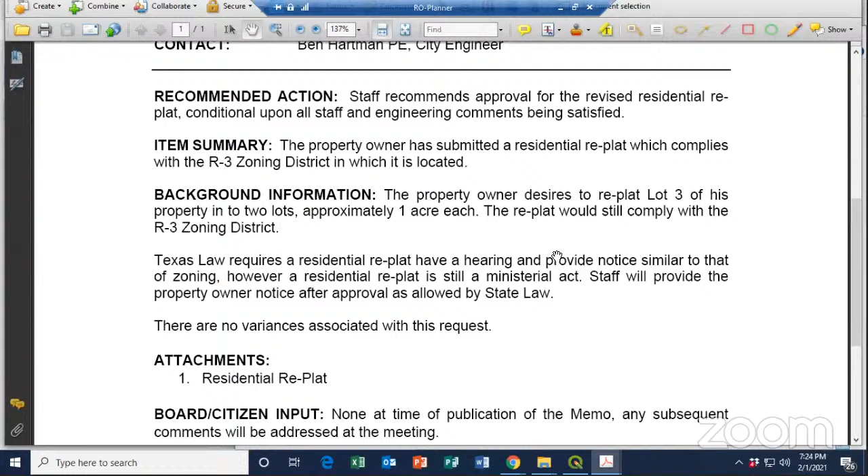Staff. Yeah, and you can see this, right? I'm sharing this correctly. So this is a very straightforward case. It's a residential replat. We've talked about residential replats before. They're a ministerial act. There are no variances or anything of that nature affiliated with this residential replat. He's basically just dividing it into 2 lots, approximately 1 acre each.

The zoning district is R3. And let me get you an image here. So again, this is off Crestview, but as you can see, to the left there's already 2 similarly sized lots. So this was an area that had kind of the 2 acre or 2+ acre lots, and a lot of people have been subdividing them into about 1 acre lots, because also with the need for septic, I don't believe there's sewer over there right now.

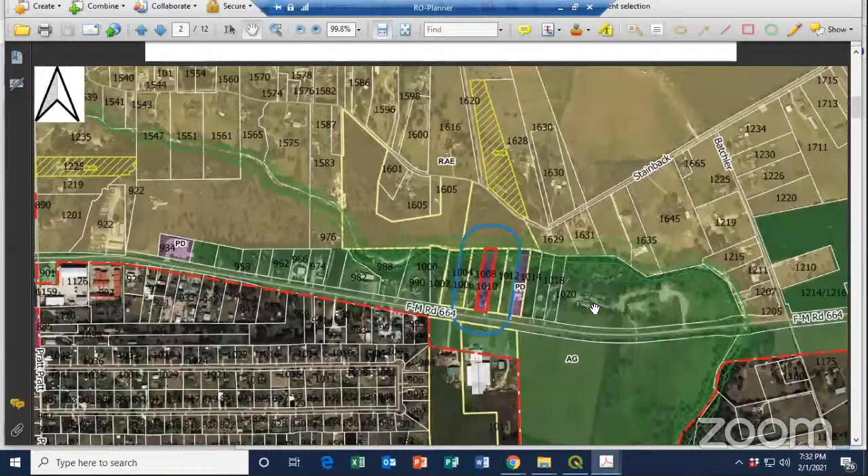So as y'all may be aware, TxDOT is widening Ovilla, also known as FM 664, and in the process they're having to do some takings up and down the road. So one issue that has come up is, in this case, let me zoom in so you can see a little better, at 1008 Ovilla.

This house was built a couple of years ago. It was zoned PD 101, so it's a custom zoning district, kind of like a site plan district. It uses residential estate as the basis for the zoning, generally speaking, but they did put in specific building plans for it.

One thing though is the house, with where they did end up siting it, which was fine, but when TxDOT comes in and does their takings, then they'll have a legal non-conforming site. So by changing the zoning and having it all conforming, then you have a legal conforming zoning district. That is better than having a non-conforming zoning district.

The other thing I guess I could point out is the house next door, like two doors down, that house isn't very old. It's pretty nice as well, but as you can tell, it's set back much further, so there was no need to initiate a zoning amendment for him because he still clears his setback requirements. That's since PD 101 and 1008 Ovilla, we're trying to help him out.

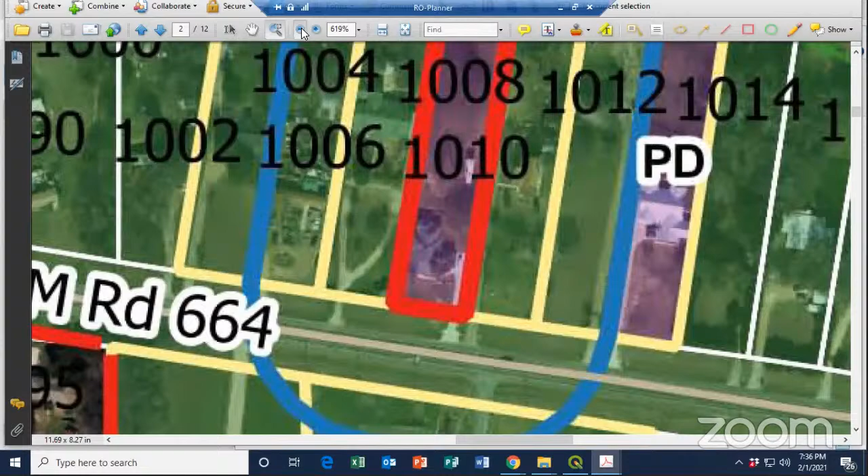Okay, and like you said, I guess all the parcels are going to be done at different times. Yeah, we're kind of waiting to hear from TxDOT on which ones they're saying, well hey, this guy is completely out of his zoning district now, or they give us site plans showing how much parking they're taking or if they're taking away a sign or something like that, and we would have to specifically adjust the zoning to make it work for them so that they can have what they did have, or at least make them conforming with their zoning. Because again, we don't want people getting hamstrung and not being able to sell their property when they do want to sell it just because it's out of compliance.

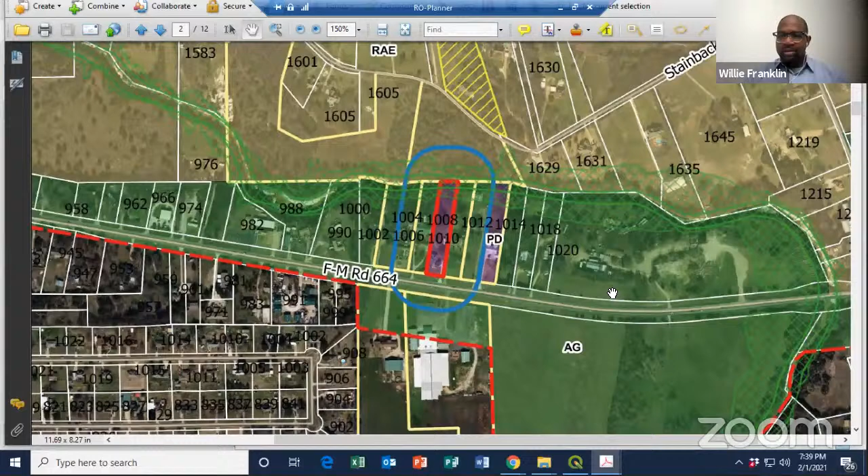If not, can I have a motion please for agenda item E? Go ahead, Mr. Vice. I motion we approve agenda item E. I second. All in favor? Aye. Aye. Any opposed? Agenda item E is approved as written.

Moving along, we're going to agenda item F. There's going to be some changes on F where, as commissioners, we're not going to have a vote. I don't know if Mr. Brewer is online. We're going to have a dialogue with the applicant, and we're going to move this to the next planning and zoning meeting. We have to make a correction for agenda item F.

So, staff, my understanding is we can't take action and vote, but we can have a discussion. We've still been kind of working with the applicant on a few changes anyway, so it may be for the best in the long run.

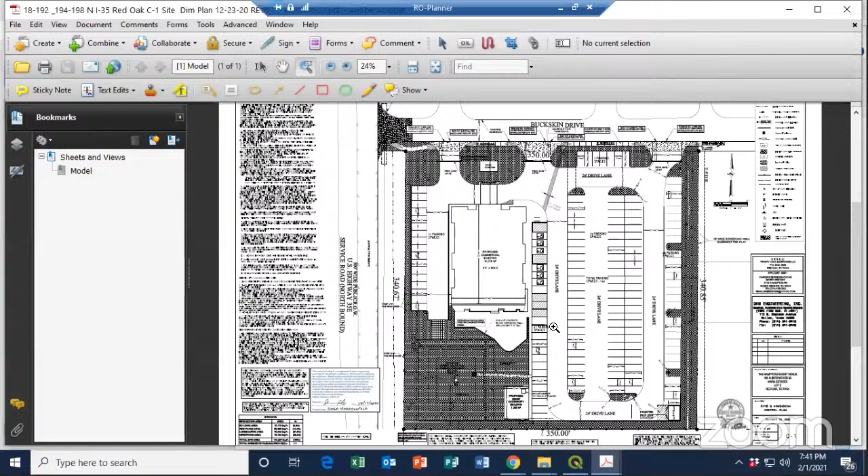So this is the Hamptons Event Center at 196 Interstate IH-35 on the east side of the highway near Buckskin Drive. Y'all may have noticed it, kind of a two-tone building. It's about 10,000 square feet that exists there now.

Mr. Brewer is interested here to the south - let me zoom in for you a little bit more - having what we're calling an accessory building of around 1,200 square feet to function kind of like a chapel service. He does mostly weddings and those kinds of special events, generally speaking. He's found a need to try to better facilitate his events, to have a separate chapel. Some of his guests may want to do a wedding service with their own church, but not everyone does or can get that time slot they're looking for. So he's providing this as part of his business plan.

The other thing is putting the building here means relocating a dumpster, so the dumpster ends up over here in the bottom right-hand corner. No real issue with that. You do lose, I believe, one space in the end by doing this, but he still has 153 spaces, and 150 were required in his PD.

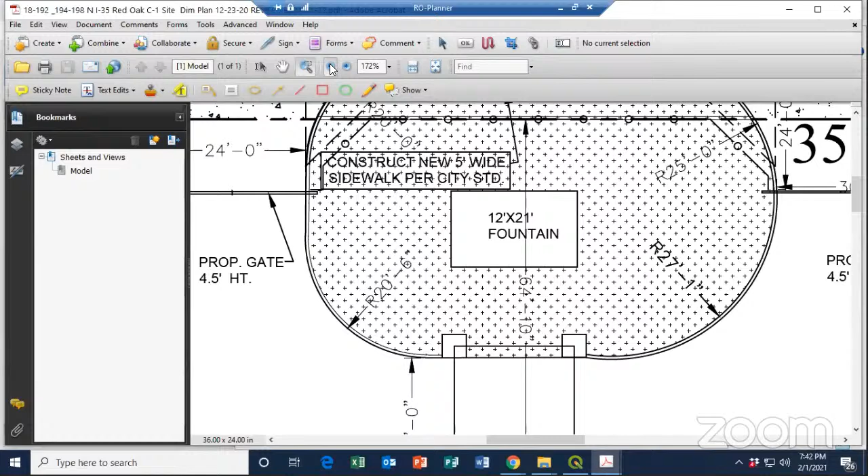Then also up front, north of the main building, he's got a fountain feature that he calls it. It also kind of looks a little bit like a monument sign. Anyways, just understand that it's there now.

I think Mr. Brewer didn't fully understand the nature of his PD. Like some people, they think they've basically got a commercial district - I mean, they do to some degree, but he has specific development plans that were submitted. So when he does stuff, a lot of it he actually really needs to come in and amend or revise that PD kind of every time. That's kind of just the downside with the planned development zoning district - unless you worked it in to have those kinds of freedoms, you've got to come back to the zoning commission and council.

Since he had already built this fountain, we asked him to put it on the development plan, just to try to align with what he's already done. So just so you know, this is there. I mean, he technically shouldn't have done it, but it's basically a fountain that's a big square cube in the middle with an H on the front.

So it's not like a sign that reads text, but it does have a letter. As a planner, I'd call it a sign, but it's also a water feature. So I mean, it's both - it's a water monument sign. But not a real issue with it though.

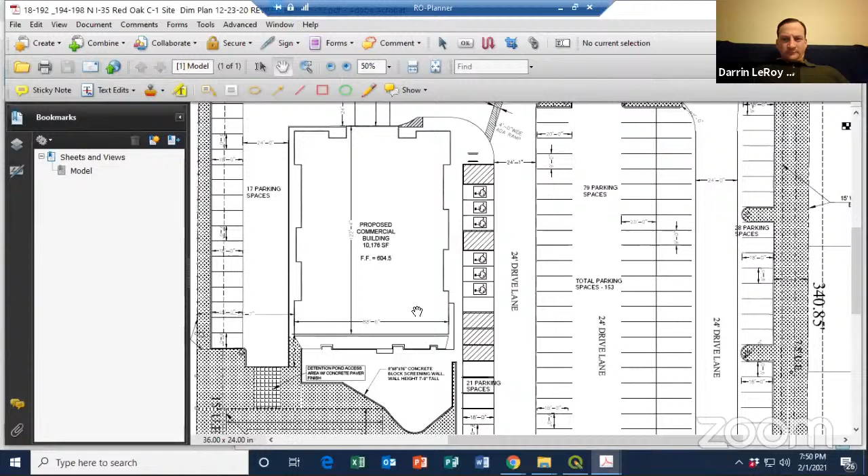Well, that's been the other thing with the parking, we don't exactly have something that fits this cleanly as far as a parking code classification for an event center. So one approach in zoning is you can start trying to slice and dice all the different uses and all the different places and calculating a complicated square footage.

The thing is, just as with his max occupancy being at 440, that depends on what the event is. There are certain event patterns he does where he's limited to closer to the 300 mark, depending on if he's got a bunch of tables set up or not. So his capacity is going to fluctuate.

I would think that a simple rule of thumb, when I was looking, seemed to be more the idea of, if you assume 3 people per car might come, you've got 153 parking spaces, so you can support 459 people. So if you have a max occupancy of 440 and you can support 459 people by that number, then you have more than enough parking.

I also talked to Chief Wolf, our police chief, and asked him to run, looking back 2 years for this area, has he had any complaints about parking? Like the idea of if Mr. Brewer had some big event, did you have any spillover? And Police Chief Wolf confirmed that they've had no issues.

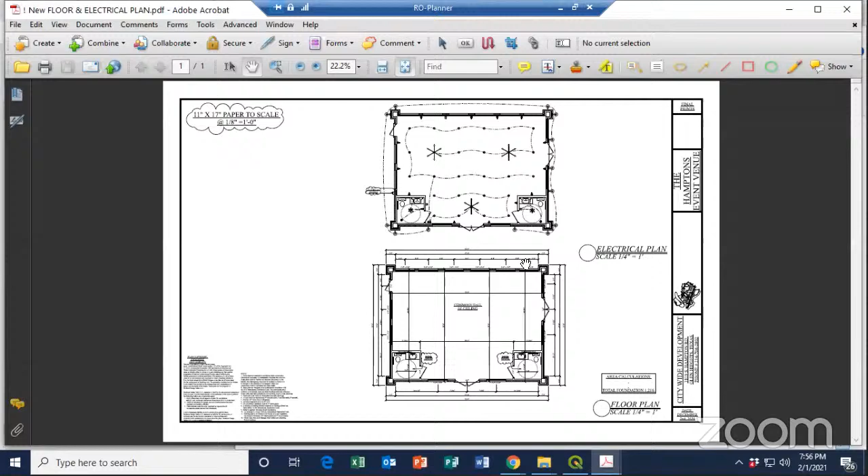He's claiming that his use would be more as, like Brian says, an accessory to the main use at the building. So you do something over in the small building, but then everybody or a certain amount of the party would then move over to the bigger building. That's not to say we're going to sit out there and try to police that, but that's what the applicant has said his intent is.

Here's the floor plan of the proposed building, ceremony hall is what he's calling it. Like I said, there's two bathrooms and just a big open floor plan. It's pretty simple. Then the elevations, we just got, Dave's been working on them.

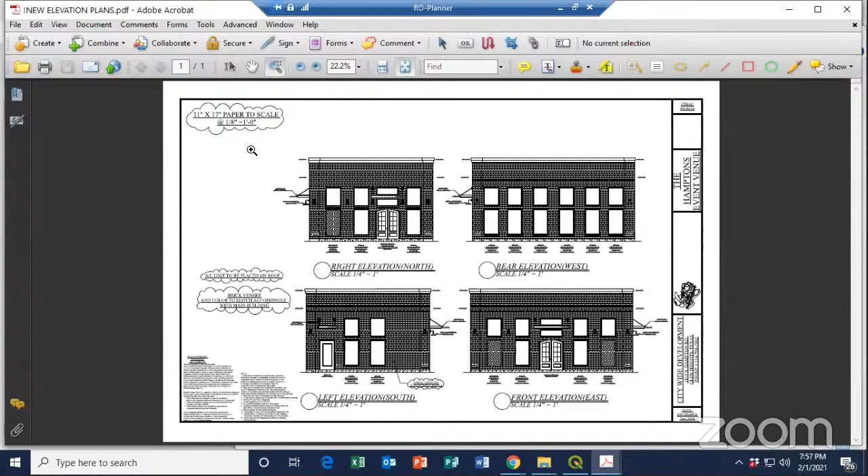He had a good idea, so he needed to work on them over the weekend. It's a little hard to see. If I go back to the floor plan real quick, it may make more sense.

You see how there's kind of these bump outs on the corners there? Before he had more of a box shape, and it looks boxy here, but if you imagine those bump outs, the intent is to mirror more of the main building, which y'all have seen on I-35. It's kind of got that horizontal articulation or variation where the wall goes in and out. So he's just trying to mirror that.

He says he'll paint to match the colors, and this top cap's going to be stucco. This is a fairly high parapet wall. The idea is you would not see the HVAC or mechanical equipment from the road, for sure.

It's the south elevation down here. This is the one that again faces south, the least visible. So the service panel will be run underground and connect to the back of the building, trying to make it the least visible.

But it's got lots of windows, and where there's not windows, he's got kind of the faux windows with the brick pattern, using similar elements of the wall sconces and the overhang as the main building. So that's the intent, is to just do like a mini version, as it were, of the main building.

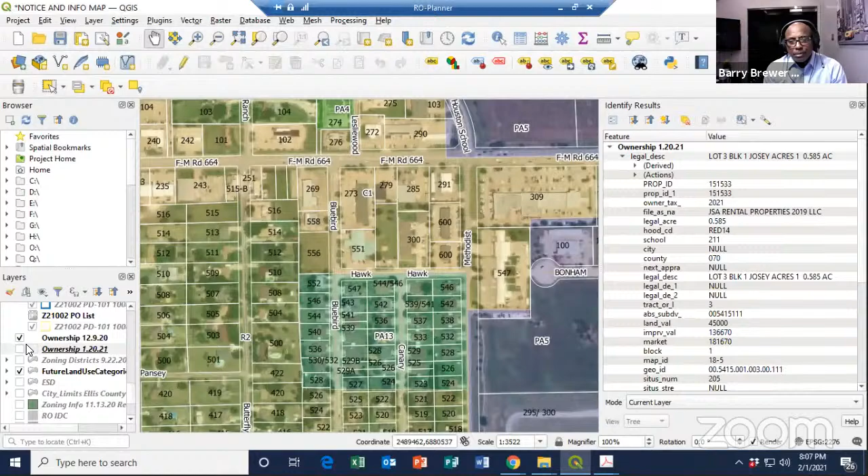Now, in most cases, the property south of me is zoned residential, so most of the time you'd have a masonry wall there. Another concern is just passersby. Once they do the enlargement of the freeway, there would be a sidewalk. Not only do we want the privacy fence for that reason, but we don't want passersby jumping into this detention pond. So that's another area of concern. We definitely want to enclose that to keep the outside public from going swimming on a hot summer evening, but also bring the beauty to what we're trying to create here at the Hamptons at Red Oak.

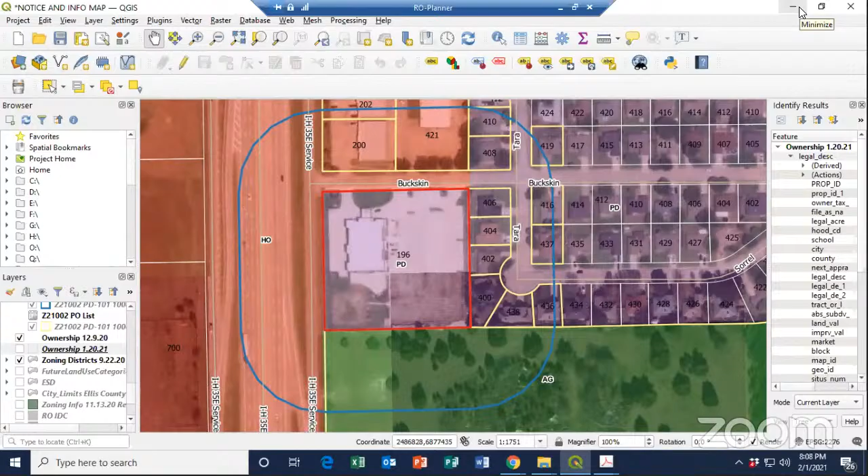Okay, makes sense. Thank you, Mr. Brewer. I believe that's all we have on our side. Unless Brian, you want to add something?

Yeah, well, I think it's one of the things, if you're wanting to create sort of this oasis, as it were, we kind of need to see a little more detail. Because we've got this detention pond area, but got the building here, so is there going to be a patio? Is there going to be a pergola? What's all this area around the building between the detention pond and this building going to be? So we're going to need to see that too for the PD. We need to see some idea of what they do there.

That's all landscaping now. We're not changing anything as far as landscaping. What we're trying to do is put a privacy fence around the southwest corner. We're not adding anything. We have a ton of landscaping. We have a pond that's a detention pond there. Basically, we're just trying to bring some privacy and protection to this portion of that pond area. That's pretty much it. We're not adding any landscaping. We have a ton of landscaping. We don't need to add any landscape.

We do not want a fence directly behind the building. That wouldn't be appealing to my eye or to anyone else who might consider having a wedding. So basically what I'm asking for is a fence around that back portion. Now, it should be code that I have one around a detention pond anyway. That should be code, so we really shouldn't be talking about whether there should be a fence. I guess the biggest issue is what type of fence will you guys allow me to have.

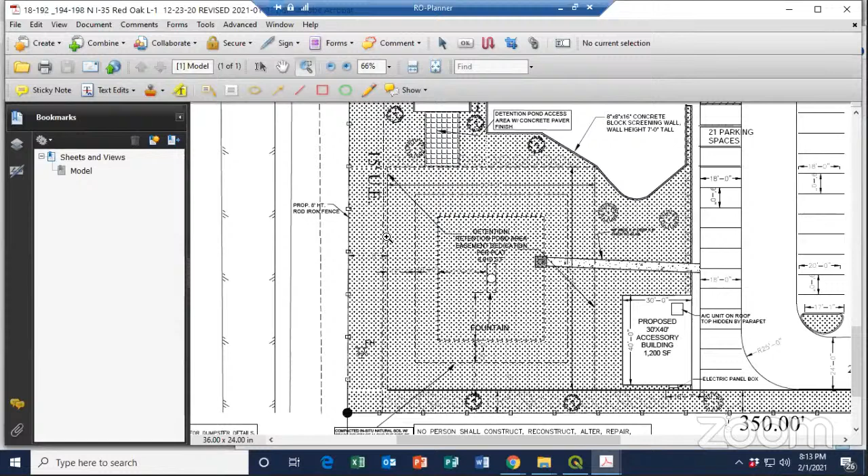And if that was something he wanted to do, if it were me, I'd rather see some trees and shrubs in front of a CMU wall if I'm driving down the road. Well, I can't put any more - I can't put any trees. We have TxDOT coming in. There's no more trees. TxDOT already picked up 2 feet of my property, so there's no room for trees.

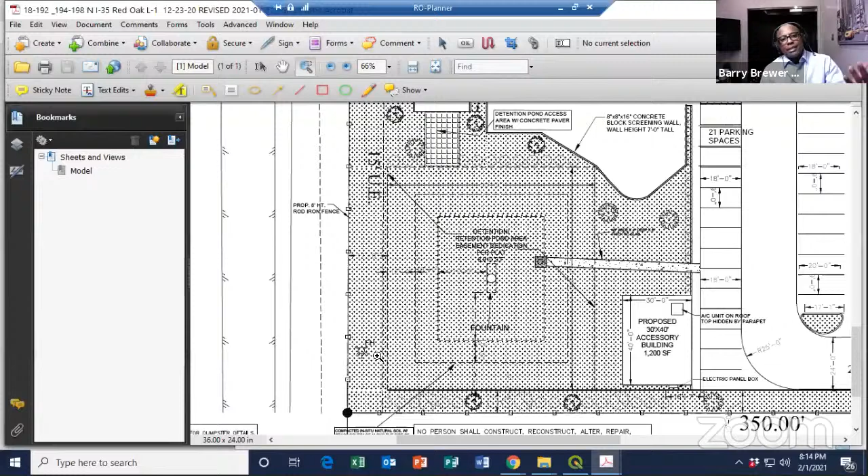We can forget about the west side - that's not happening because they'll be, I believe, within the next 2 months working on that. Once they get started, we have an open concept to construction, open to the freeway as well. So, at the end of the day, Brian, the address was placed wrong. If the address was placed right, we could probably move forward.

If you guys tell me what type of fence is suitable for the Red Oak, I'll do it. I don't have a problem with it. I just want to move forward tonight because I had this on the agenda for tonight. So if we can discuss it and get it finalized, I'm good with whatever fence you come up with.

Okay, so Brian, what we need to just produce to Mr. Brewer - some pictures? No, I mean, there's an opportunity for y'all to have a chance to give any kind of advice, so when we bring it back next month, hopefully it's a real quick hearing.

And like I said, to me his issue is just the fence part, right? Is it just a fence? He's open to... yeah, I mean, we're asking for - he's not. Yeah, it's just one of the things - staff shouldn't be in the position of necessarily trying to design anything for anybody. That's what the consultants are for. But we want to be mindful on y'all's behalf of what comes in front of you on the aesthetics.

So if he's saying he'll build whatever y'all may ask, and there's no room for any landscaping, and if he wants the highest performing sound deadening option, it sounds to me like that's a solid wall. I don't recall if you can go over 6 feet with a solid masonry wall. I believe it's 8 feet. If not, I guess you could do a 2-foot wood topper on it, but it seems like it's going to have to be a really nice looking wall fence, if it's going to be that prominent on I-35, I would think.

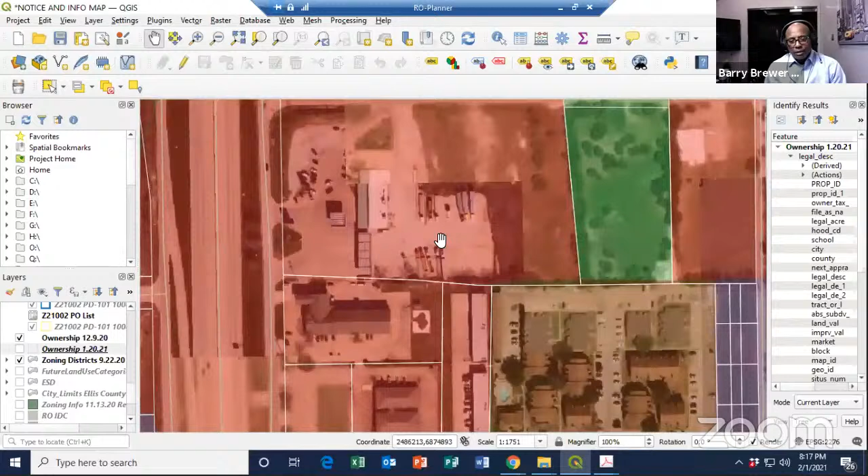But Brian, you guys allowed for a chain link fence 2 blocks up for the truck company that needed to protect their equipment. It seemed to be just recently repaired or replaced, but it's a full chain link fence with barbed wire on it. So I'm just asking for a good looking fence with some privacy, that's pretty much it. But if you go up the street there, you have a full chain link fence around this guy's property.

Once again, I'm just trying to come up with a final conclusion since for some reason my address was placed up the street. I was supposed to hear this out tonight and get it finalized to move forward. I would still like to discuss, let's come up with a fence as if my address was right on this evening, and let's get it finalized so we can move forward for next month. That's what I'm asking, since the address was mistakenly put in the system wrong.

Well, since you brought up the truck stop, just so everyone's clear, the truck stop is zoned highway oriented. I don't know anything about barbed wire. No, not the truck stop, it's some company that starts with a K, I can't think of the company name, but it's right up the street.

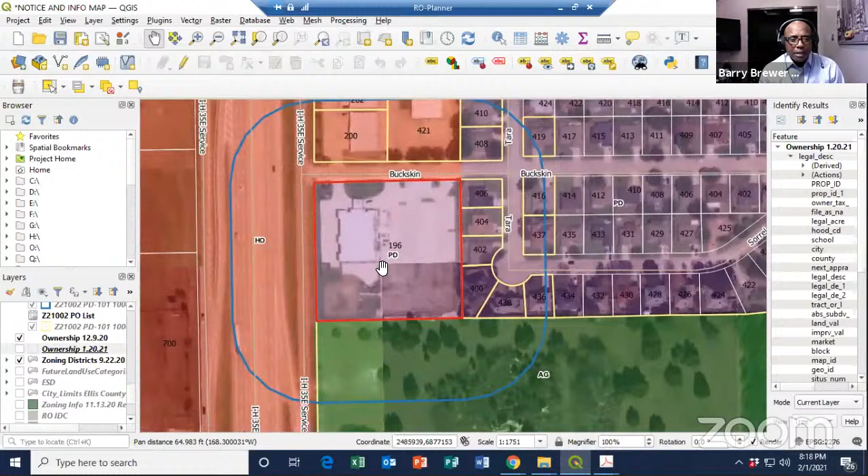Yeah, it's zoned differently. I was on the council when that was done. Okay, and I understand it. Yeah, that may be it there. I mean zoned differently, I understand that, but at the same time it's on the highway. I mean anytime it faces the highway, the city, I mean, hey. I can kind of speak to that from past experience, we would love for that not to have been on the highway. That's been there a long time. Okay, unfortunately. But go ahead, sir.

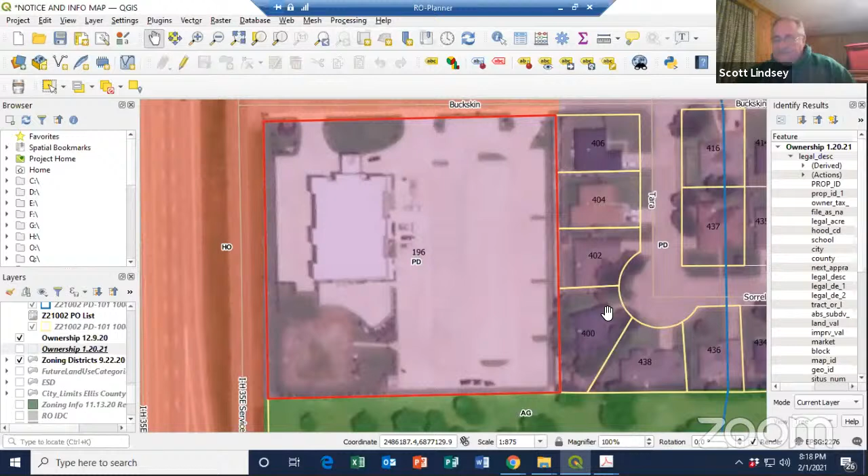No, I'm willing to do whatever, guys. If you guys think a masonry fence, I would do a masonry fence that mirrors what I have. I don't want to get too far off track to where we have 4 or 5 different fences. But if you guys think a cedar fence would look good, I would do that, I don't have a problem with that. I mean the biggest thing, I know sound is my biggest component now, but I really want to take the visual aspect out of it as well.

Let me look up this code here real quick. Okay, so yeah, you can go up to 8 feet. So if you wanted to do a masonry wall, you could go up to 8 feet, if we were applying the standard code anyway. So it sounds like you've got 8 feet to work with anyway, whether you wanted to do a masonry wall or bring whatever forward for them to consider.

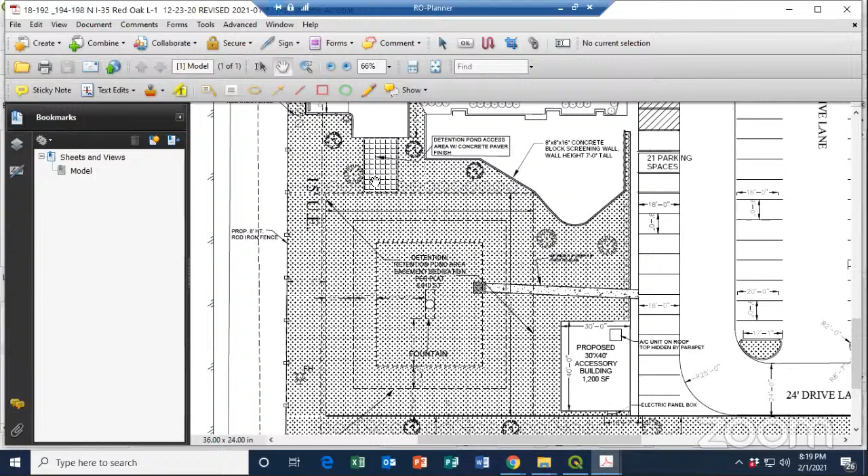Right, he just needs to bring that next month. Since we're hearing it next month, he needs to bring in pictures of the masonry wall. Sounds good. And just to be clear, I'm not taking the wall all the way up the west side. I would take it, if you go right there, just where you have it pinned, it will stop right there, and that'll be it. That'll be the exit point there, and then you drop down to a 4-foot type of fence.

Yeah, so basically kind of like where the parking lot begins. Right, so then it would transition or drop down. And again, that's kind of like one of those points, I guess I should ask y'all, since we're here, would you want to see it transition, or would you want to see a 90-degree drop? Because those are the kind of details that are subjective, it's hard for staff to tell an applicant do a transition or do a drop. So it'd be good, since we're here, if y'all have a preference, to let them know now.

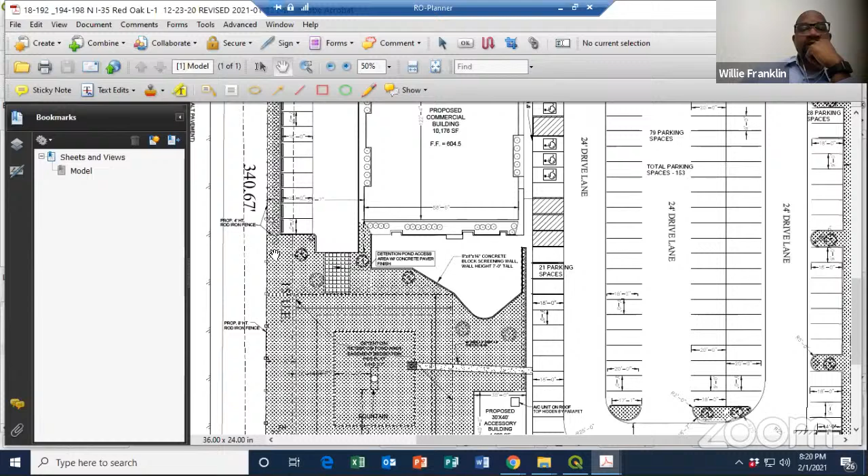I would love to see the transition. Personally, that's what I would prefer to see versus the drop. I think it gives a cleaner look, in my opinion. Agree. Mr. Brewer, is that what you were thinking of? A nice little transition down. Yes. Right.

Anything else you might see that he might need? I do have a question for staff about this accessory building. Is that something we are discussing as well, since I see it proposed? Yes, I've shown the floor plan and some elevations. I can bring them up here again.

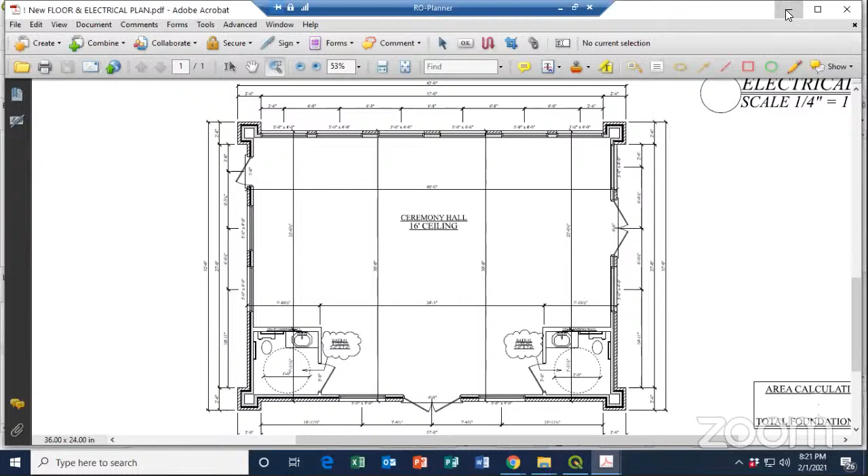Mr. Brewer calls it the ceremony hall. It's got 2 bathrooms and an open floor plan, otherwise 1,200 square feet. I call your attention to the corners, kind of punch out. The idea is this accessory building is to mirror and look like the main building, trying to replicate that same architecture. And then the elevations are here. It's a little hard to see how it punches out in the corners, but that's what is being shown in the elevation. The top cap would be stucco, and the colors painted to match the main, so it's just meant to have a continuous look.

My question is for this zoning, does it require—I guess we're calling this a chapel—are there any size restrictions as far as this being an accessory structure to a main building? Is 1,200 square feet sufficient? No, this PD is a custom zoning district that just had the development plan and a few restrictions such as occupancy. So it's one of those site plan zoning districts, no real regulation that specifically allows or disallows it. That's why he's got to bring it to y'all to ask if he can do it. So really for anything, if you wanted to add a 200 square foot storage shed for tables or something, you need to come back and ask.

Okay, just wanted to make sure. That's all I have.

And you answered my question earlier, Brian, on not having any double events. That was a concern with the parking, but you answered that's not the plan for Mr. Brewer. Is that correct? That is correct. This is to be an accessory structure and just part of doing one event, not two events at the same time. And I'd like to speak on that. Yes, it will not be any additional events, it's only for the use of the larger space. We just found a great need that we needed this ceremony space to accompany the reception hall as well. So it will not hold two events, we're not equipped to do so.

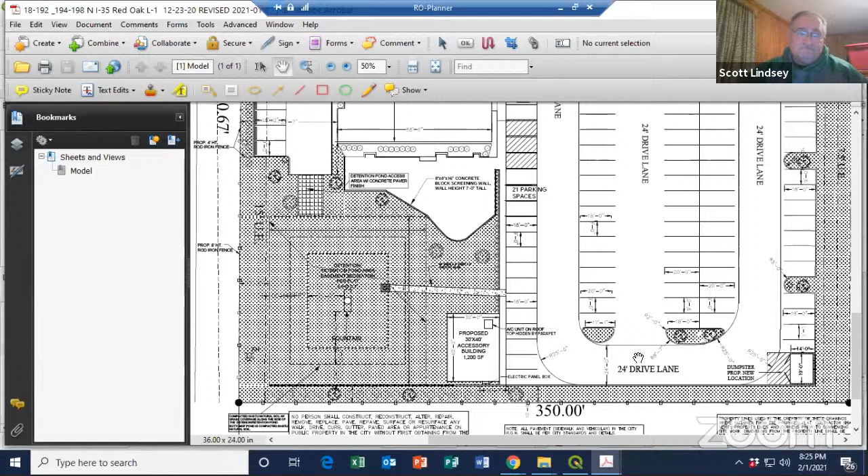We get that cedar up pretty quick too. I would just like to see two options if it's possible. All right. It sounds like the masonry wall would give you the best benefit for your sound issues, unless you wanted to address that on the inside, like Brian was saying. I agree.

Okay, well, again, I apologize to Mr. Brewer for the notice getting botched, but all I can say is I apologize for that. We'll have to bring it back next month.

All right, Mr. Brewer, you have any more questions for the staff? Got a clear idea of what we're looking for? I believe so. I would get with Brian, he's been a big help, really working hard with me. At the end of the day, we're good friends, so he's been a wonderful help. I'll get with Brian and work things out, try to figure out a nice plan that fits the city, complete this project, and make you guys happy. So I look forward to working with Brian.

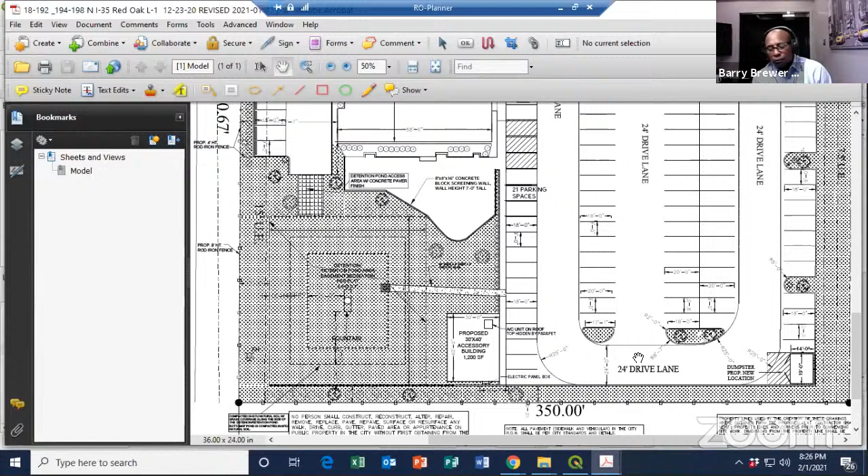Okay, thank you, Mr. Brewer. I guess we can move to agenda item G, conduct a public hearing and consider amending the comprehensive planning area PA-3 to provide for an increase in the DUA from 10 to 16 and to allow for apartments as a form and use in an area to be known as PA-3A, and to correct minor errors in PA-3, City of Red Oak, Texas. Case number A21001, requested by city staff.

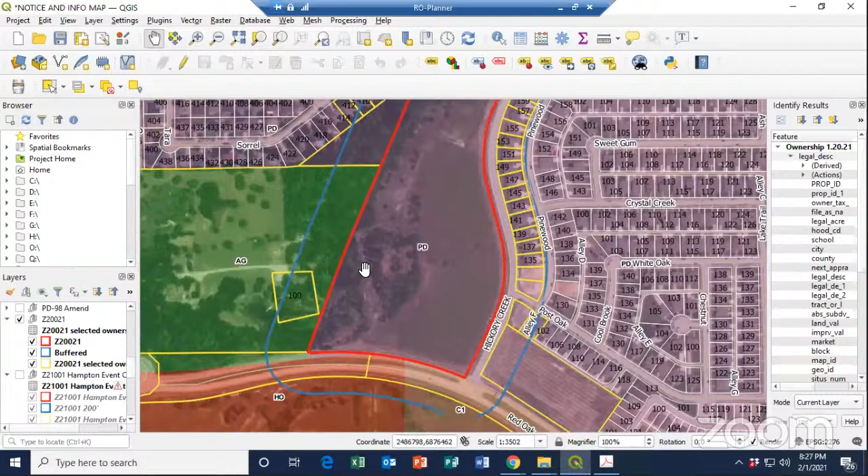So you may remember last month we were talking about some apartments, and we had the issue here, this general area where the apartments would be. It was zoned, kind of partially zoned for apartments with some restrictions, back in 2003.

But then in 2010, the city adopted its first ever comprehensive land use plan. In preparation for bringing the case forward, talking to the city attorney about reviewing cases, she brought up a very valid point: your zoning and your comp plan need to align. No disagreement, it's just this has been weird because in 2003 they kind of partially did a zoning, but you have to bring that development plan back.

But then in 2010 you've got this comp plan, and the comp plan seems inconsistent with the zoning. So we need to make sure that whatever happens at the end of the day, the two are aligned. The comp plan is limiting the density to 10. Well, the apartments would be 16, which the zoning says they could have a max density of 16 dwelling units per acre. But planning area 3 and its text in the comp plan... maybe it's better if I just show you the pages. This is why it's very important that the consultant be very consistent and clear in their plan, and also that they're told what needs to happen.

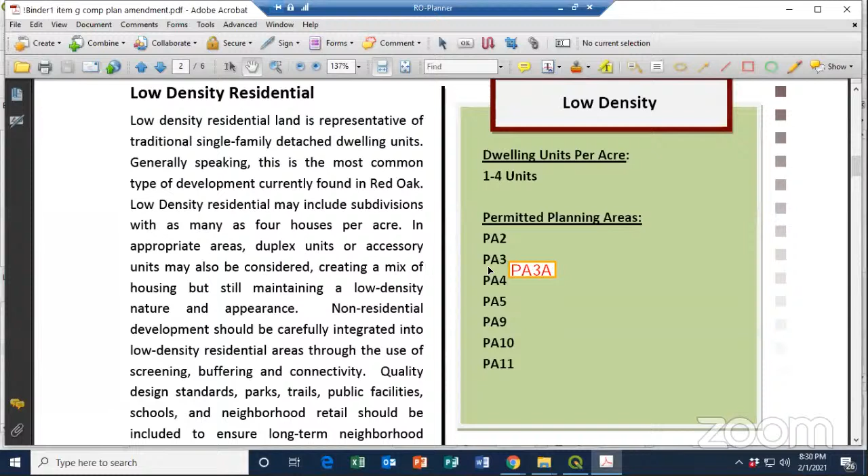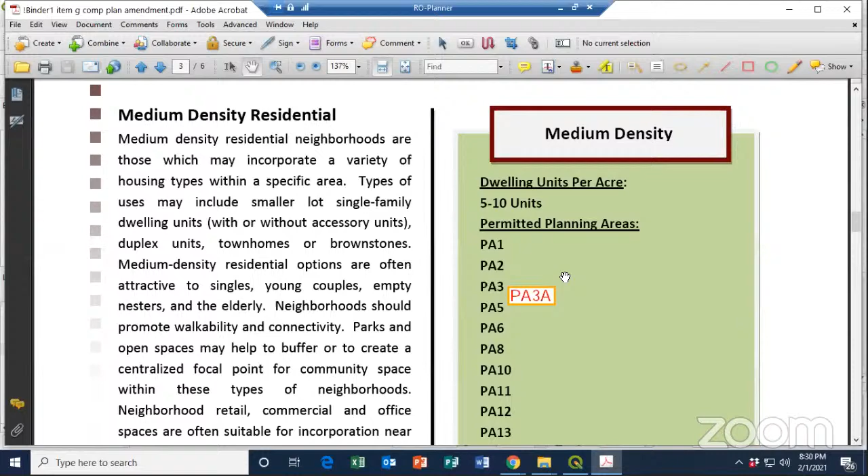All that to say, when we look at the comp plan in this case, planning area 3, which is where this is, would allow low-density single-family residential according to one page, which is fine. Then there's another page for medium density, 5 to 10 dwelling units, mentioning townhomes and brownstones. But then the high-density section that would apply to apartments does not mention planning area 3.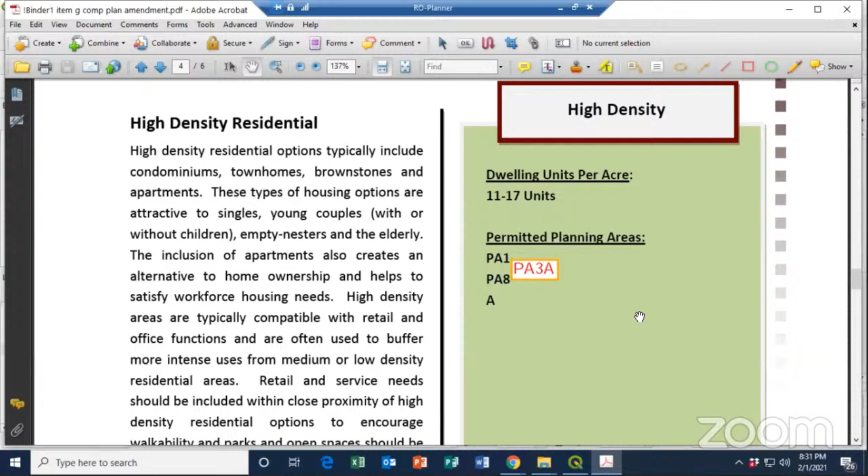From what I understand in talking to the property owner, Mr. Leibowitz, and the city manager, who were both here at the time, it didn't sound like they had any expectation that this would have occurred. And there's evidence for why that may be the case.

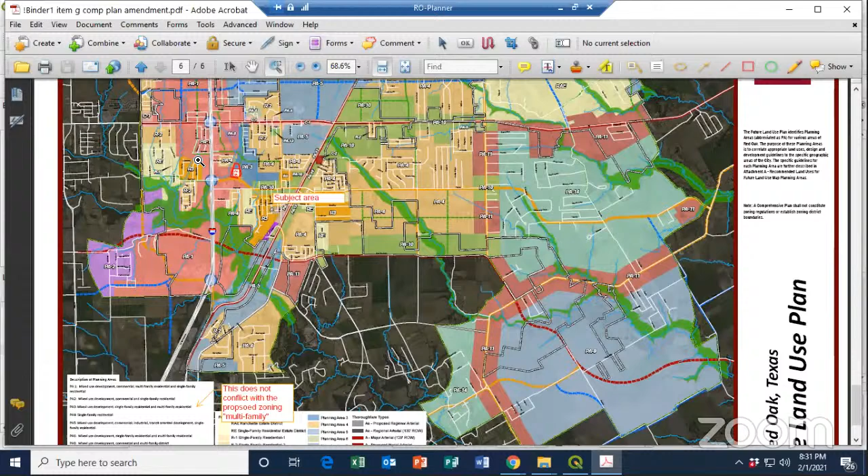When you look at this other section, which annoys me because to me it looks like zoning, it's planning area 3, land use categories. It says restrict all residential uses. I'm kind of thinking that's an error, because I seriously doubt in planning area 3, given that it's a fairly localized area, that the intent was to ever restrict all residential uses. Planning area 3 is basically Hickory Creek, this blue area.

Sorry, I'm having a lag here, trying to get this for you. But basically, this blue area here is the only planning area 3 in your entire comp plan. It's always known to be residential of some form.

Right. So clearly that chart was wrong, right? And just applying a little common sense from what we see, obviously some level of residential was allowed. It's not my call, obviously, but I tried to outline the area.

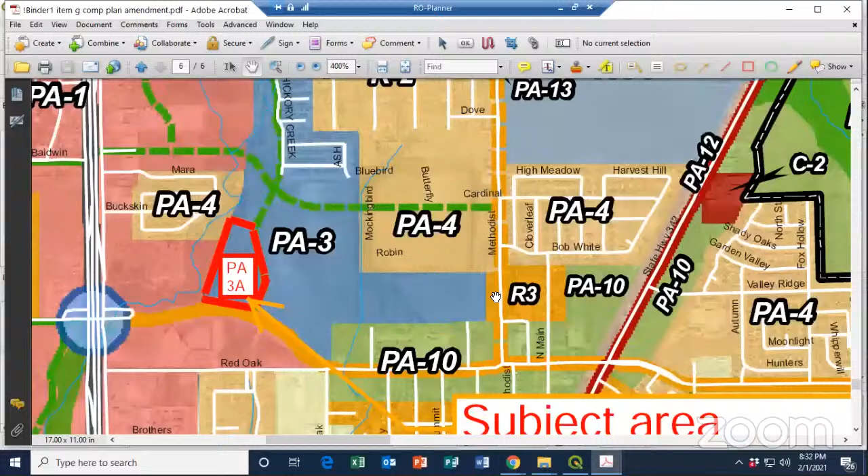It would seem weird that you'd have the zoning in place, because normally, and the city has done this in other instances, they'll call out an existing zoning district that's developed to try to say, hey, don't worry, we're not gonna mess with you.

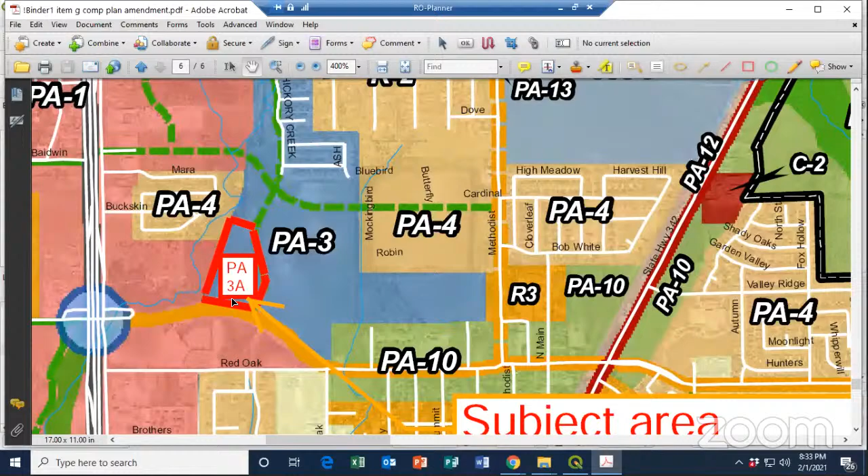My best guess, and again, I was not here, I do not know it for a fact, but this idea that this area would be limited below what the zoning had entitled it to in terms of density and apartment, seems like there's a good chance maybe that was an error.

But at the end of the day, the two need to align. Y'all still have the discretion to vote the comp plan amendment up or down, but that's my best understanding of what has happened: most likely an unintended error in the development of the comp plan that the property owner and applicant have found themselves in at the moment, the stumbling block for them.

So your options are, you can approve the comp plan amendment. If you do, that means you're saying that apartment and basically 16 dwelling units per acre may be okay. It doesn't mean you're automatically having to approve the zoning amendment. It just means you're essentially honoring what was in the original PD of apartments in this area with a max dwelling unit per acre of 16.

Now again, as we've been debating, what does it look like in the form and the site plan and all those finalized details are all still subject to your discretion. So you can approve the comp plan amendment and not necessarily approve as is or at all what they brought forward as an amendment. Not saying either way, just saying that's the option.

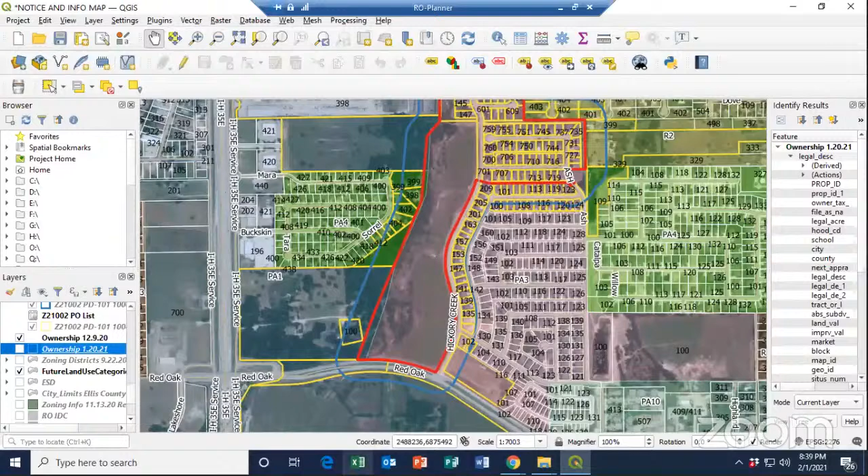Next on the list, we have agenda item H, conduct a public hearing and consider amending plan development PD 27 with a development plan and other amendments as needed to provide for an apartment complex on approximately 17.1 acres, generally at the northwest corner of Red Oak Road and Hickory Drive, City of Red Oak, Texas. Case number Z21002, requested by Louis Leibowitz. Staff.

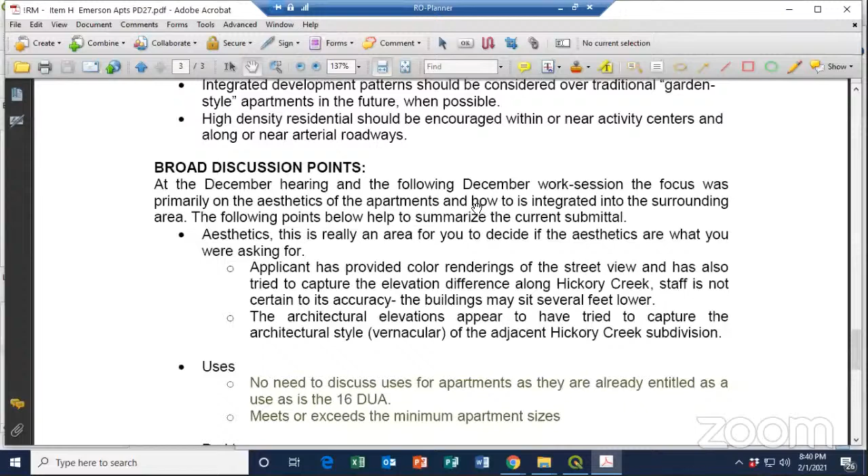Okay, so we've been talking about this for some time, and before I get started, I'll say I re-noticed everything for this again because the language changed a little bit, time had passed. So to ensure we're dotting I's, crossing T's, I re-noticed everything and got 2 contacts, I think 1 phone call and 1 email, basically asking questions that amounted to 'what can I do about this,' which implies they're against it. But that's all I've had. I didn't get as much contact as I did the last time around, so I wanted to put that out there before I forget to mention. But anyways, we've talked about this at length, so I don't necessarily want to go over everything all over again, but I'm happy to answer any questions if we need to revisit.

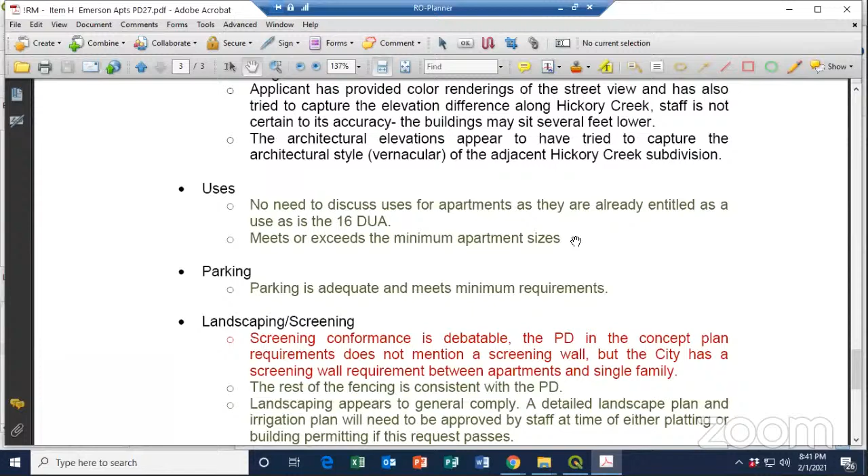What I wanted to do was first go through the text of it, to give you an idea, if you saw in the memo, I tried to color code it a little - black being neutral, green being seems good, and red being a sticking point. So in a nutshell, from my notes and memory from the work session and first public hearing, it seemed like he has addressed everything that the zoning commission and staff has asked for, almost. How he's addressed it, y'all, it's subjective - you may or may not like it, but it's been addressed.

The one sticking point that's still there is this issue of the screening conformance. The concept - and I want to be fair so you can all read it, not just hear my interpretation. So in the PD, the concept plan requirements - bear with me as I scroll to it. Maybe I should slide. Let's see, where is it? A 6-foot brick, stone, wrought iron screening wall with landscaping, sprinkler system, columns of brick and stone every 30 feet on center. So that's what it has in the zoning concept plan requirement.

So that's there. Again, this is why, when we do PDs, I believe you should either do it as a site plan district where they give you the plans and that's the regulation, or you do an actual PD where it's a mini zoning code. I would never advise doing this, because now we have this debate of, well, really? That's all you had to do, all the way around, when the city had, as far as I know, that screening wall requirement between apartments and single family. So for staff, that is the one sticking point we have - not sure in the end which really applies. Maybe it's a question for the city attorney to advise us on as a planner. Again, I'm not the attorney, but it would seem to me that y'all would still have discretion on requiring that screening wall.

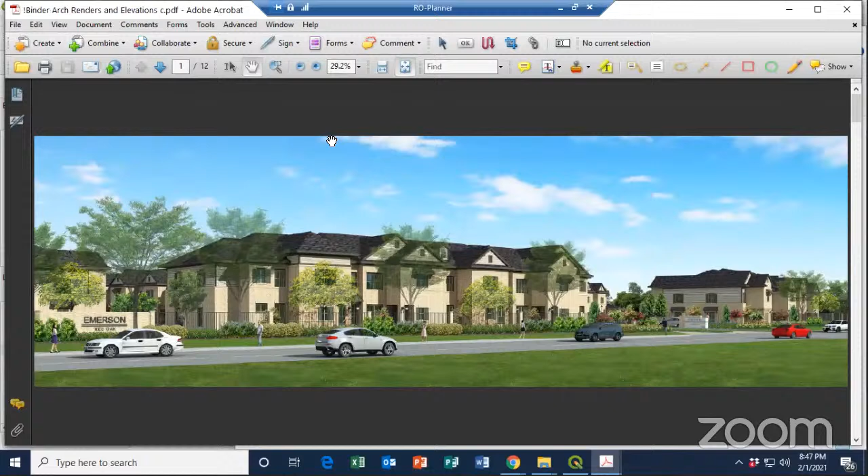So they reworked some of these elevations to include comments. There's not a good splitting of the difference on this. One issue we may still have...

I guess it's this one. This is the idea that, as we've talked about, the elevation slopes down away from the road, and depending on where the elevation lands after you grade it and build something on it, is it 4 feet down, 3 feet down, 6 feet down, what is it. From this angle it may be hard to tell, but in theory it's probably, Ben, at least 3 to 4 feet lower? Yeah, I think 4 feet starting at that corner, and it goes all the way to 6, a little further down.

That's something that may not be entirely obvious in the elevation, so we wanted to bring that to your attention. He's worked on providing these renderings to give you a better idea, and asked him to make some of these trees a little more transparent so you get a better feel for the architecture of the building, since it'll take a while for a tree to get that big.

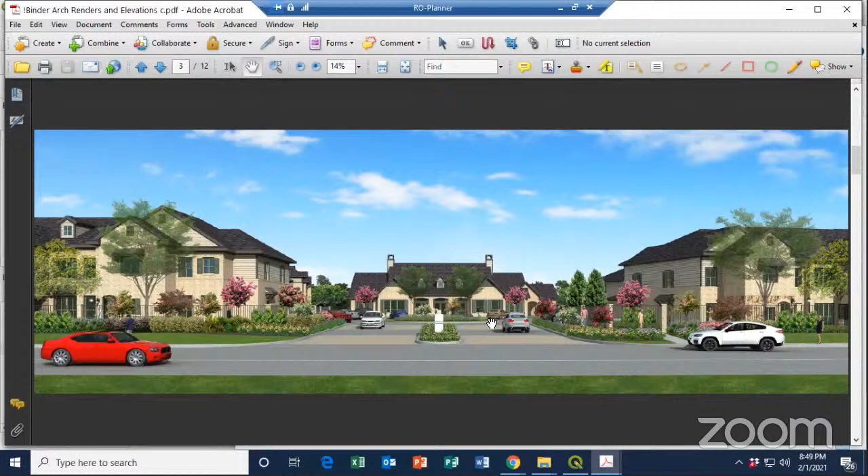Then these are the colored architectural elevations with the straight-on view. This is one of the units with the garages. Again, you wouldn't see garages from the front - this would all be internalized.

Building type 2 - sorry, I'm looking for the one from the street view. I believe this would be one of the types that you see from the street. So y'all had mentioned having kind of that drop down in the roof line on the side, so he's showing that.

I'm not going to go over everything - y'all had plenty of trees killed to print the packet, but also just for the public record so they can see, and again, having some breakup of that roof line. Here's the front of the clubhouse. So that's the color part, and let me get you more.

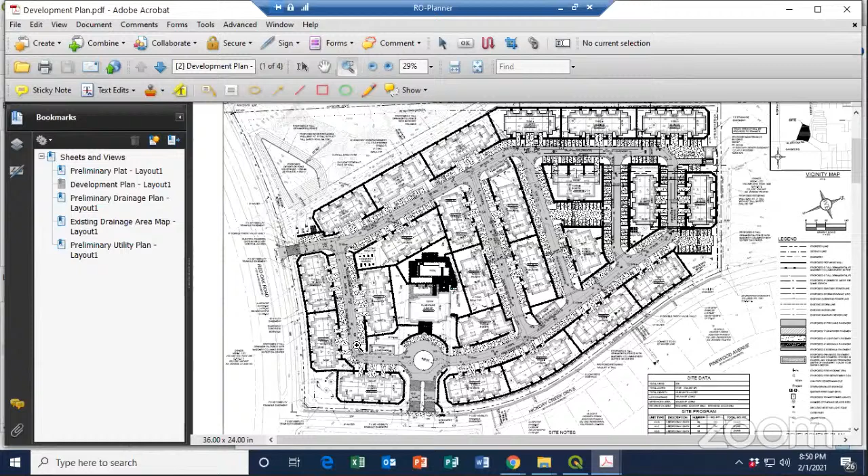On that hard corner that we've talked about, the plan is just to have a kind of more of a large monument ground type sign, which would give it some prominence with the landscaping, but still sticking to this plan as a separate unit.

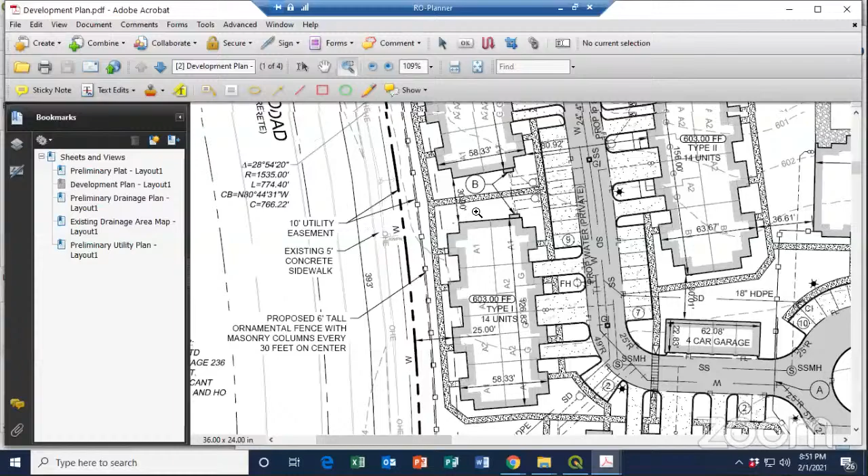The backside - actually I should show you the different plan, bear with me. Trying to multitask here, got sort of the landscape architect plan. Yeah there wasn't in there - so here it is, must have cut and paste instead of copy and paste.

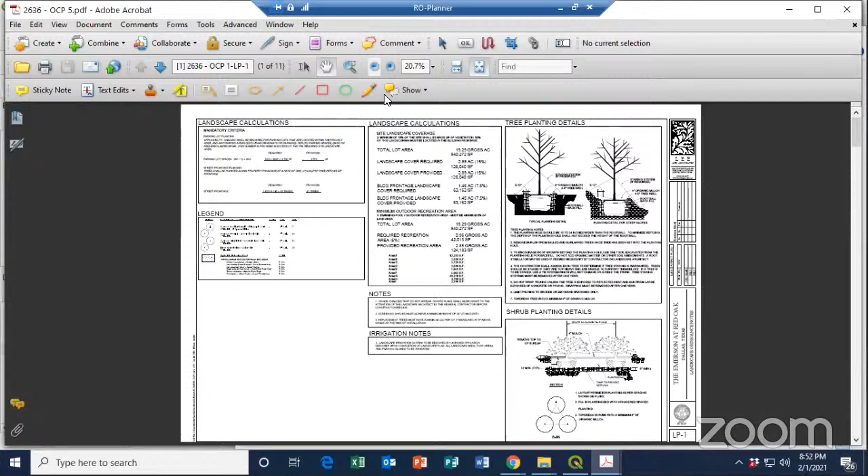In this northwest corner, you've still got your detention pond and everything, and it's fenced off. You've got some landscaping - we've done more to kind of amenitize this back area. This shaded out area is the manicured area for the dog park, but really the whole area within the perimeter of the fence is technically available.

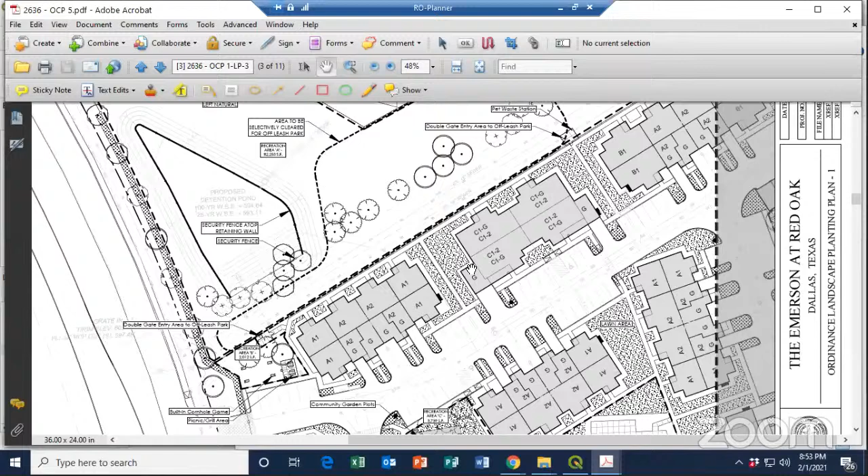We'll get you - let's see, focus on just the right landscaping - okay, the corner, yeah.

I just wanted everyone to be aware, they're planting trees up and down the right of way, all along Red Oak Road and Hickory Creek. And here's that corner sign I was mentioning earlier that would be located here, and again they're doing trees - live oaks and red oaks, a mix up and down the street.

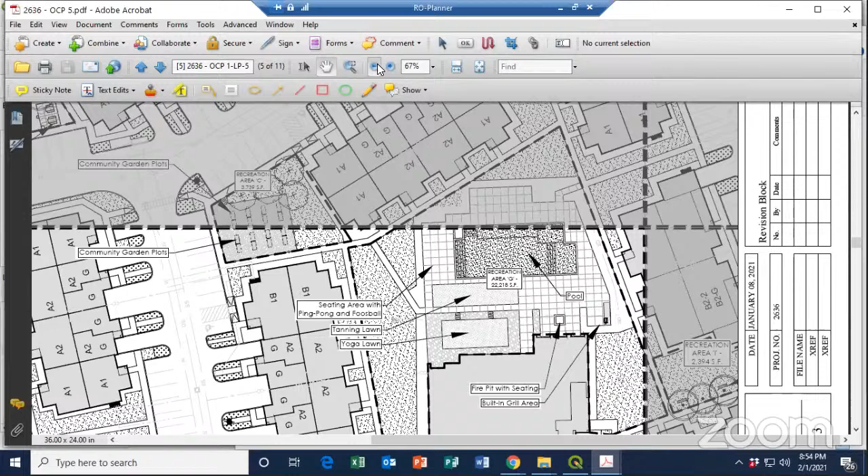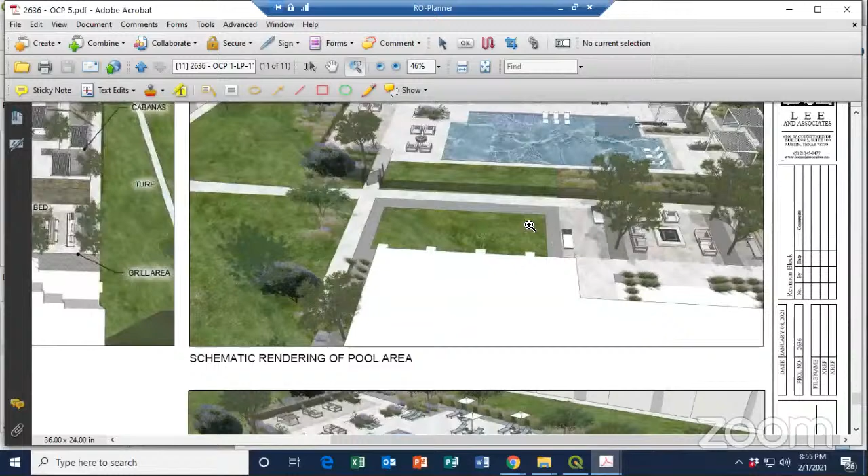This is one of the things we'd include as one of the exhibits in the ordinance, because later on we want to be flexible and not necessarily get into the exact detail of which set of lawn chairs you're getting. But at the same time, we need some kind of protection - something to say, if he comes in - I'm not saying he would, but we always have to imagine the worst if we're not given specifics - with something that didn't seem consistent with the picture shown, we need something to point to.

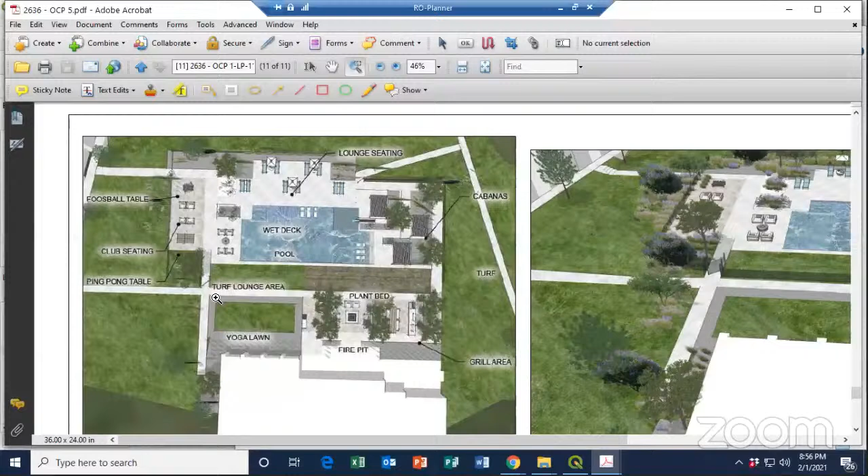That's why we would keep this as one of the exhibits to the ordinance, so staff has something to work with when doing the building permits or inspections for a CO later, to make sure it seems like it's generally what was understood and being presented to y'all.

And of course, these pictures are just to give you the idea. No one's going to hold them specifically to this exact architecture, but it's just to give that idea, like in this case, the yoga lawn. Obviously we're not going to expect them to provide yoga mats. We're just going to expect that, yep, there's a lawn, great, there's a yoga lawn.

The club seating, that's just again to give you the idea, so we'll expect to see some benches. The fire table, this one looks nice but it's more contemporary. If it looks like that, that's great. If it looks quality, like something similar but maybe a different aesthetic, that's fine.

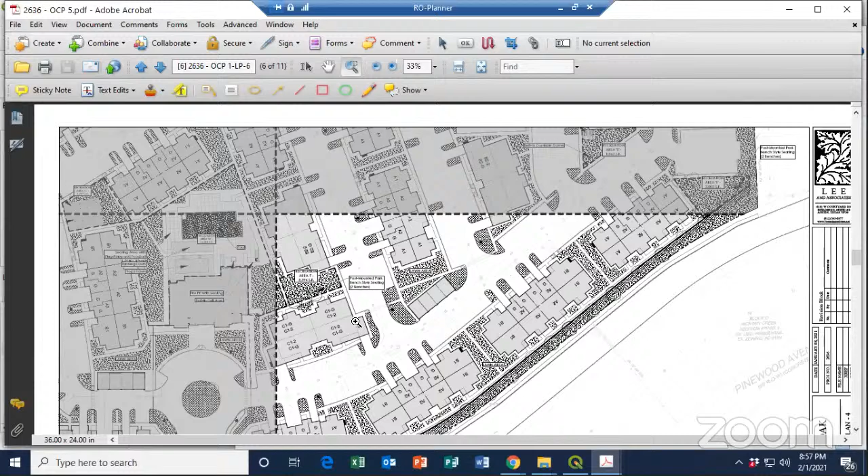But that's kind of the level of detail staff is left to deal with in the end. It's also more interior to the lot, so y'all may not know, but it also goes to the idea of the value of the plan. Also in some of these corners there's some recreation areas where I think he's specifically calling out cornhole games. I don't think we're going to get into regulating and enforcing cornhole boards, but there are areas provided for recreation and games.

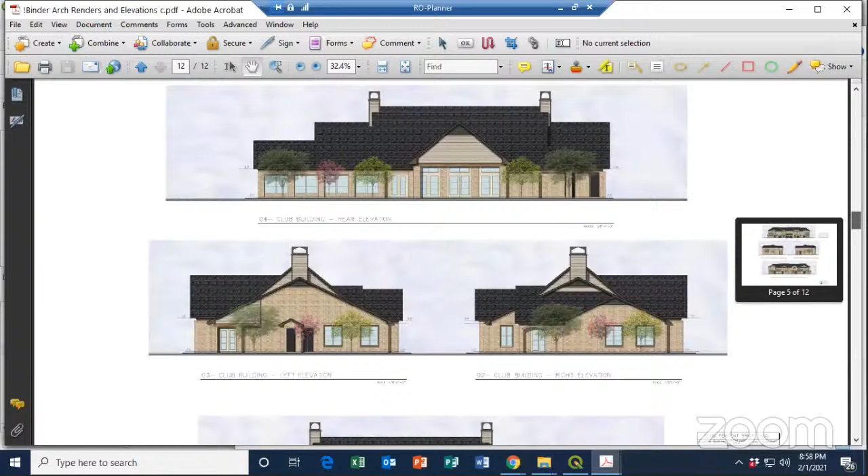Am I forgetting anything, Ben? I don't think so. I don't know if we want to go back to the color and elevations to point out some of the items that were added via our conversation at the work session. I think it was the very first elevation, the one they went back and revised after being asked to go to the actual render. I think it was that bottom one, yeah, if you zoom in on that.

So they went over to Hickory Creek and pulled some of the elements off some of the homes there, like that brick cross pattern. They've got a different stone accent, kind of like we talked about, and then the big things were adding the gables in instead of just having one big hip roof. That really changed the dimensions of the elevation, gave it more relief or better looking relief that kind of mirrored some of the architecture in the Hickory Creek subdivision across the street.

Other than that, I don't remember specifically. The dormers, they added dormers to the top as well, which was another comment, dormer shutters, and then above the windows they added some of the, I don't know what they're called, the little shed roofs that come off. So again, they went into the subdivision because they were asked to make it look more like single-family homes and to use the aesthetic of the single-family homes across the street, which they did.

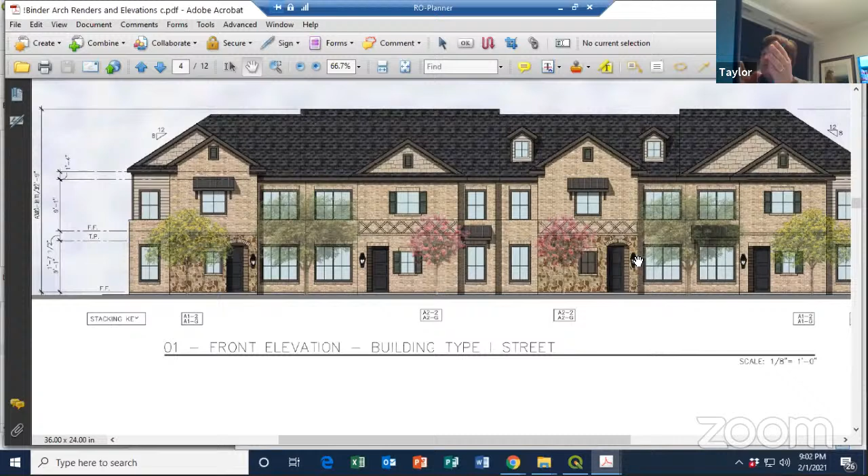And then the other thing we did is you guys asked that no two facades for a home be the same. So there's 4 separate types of facades as you move down the face of this building, and we did that with the different buildings, and we tried to do that so you could say, oh, I'm at the arched opening with the single gable, and I'm at the arched opening with the double gable, and each one's just a little bit different. We tried to break that up as you guys wanted us to do.

With that being said, I'm here to just answer any questions you guys have, and we appreciate your time.

Thank you, sir. Is anyone else in favor of this item? Anyone opposed to this item? Can I have a motion to close the public hearing? Motion to close. I second. Thank you.

Commissioners, y'all have any questions or concerns about the agenda item? Go ahead, Mr. Franklin. Well, my first one will be, I have 2, but my first one will be, I didn't see the location of the mechanical utilities. I didn't see the location of those this time.

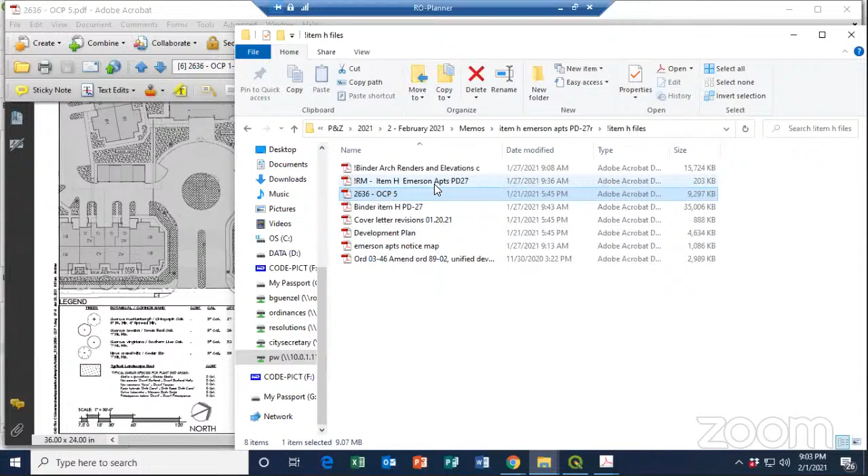Yeah, it's gonna take a little longer, but we got a lot of documents. We're gonna try to find it, Willie. I think they had done a small sketch of how they would be laid out, and it was in the landscape plans. Oh, okay. Right there.

Yeah, so they're kind of tucked in between some of the alcoves, and then they've got shrubs around them. Can you see that on the screen? Yeah, I see. Yeah, so showing the landscaping side view with the two mechanicals back there, overhead version.

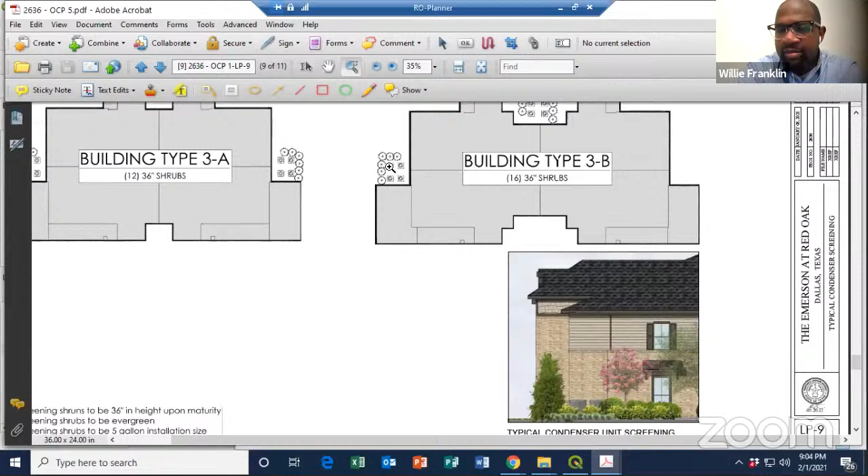All right. And I know we've seen Mr. Taylor quite a few times on this project, but I have to say, just for me personally, I do think he finally got it to a Red Oak new standard, in my personal opinion. I think it took a few tries, but I think he applied the majority of everything that we asked for. Assuming these renderings are brought to life, I have to applaud him and say he did a great job of listening and applying most of the things we asked for to create a new standard here in Red Oak.

I second that, Willie. I think the first try was nice, but it really didn't fit the area. Not everybody was really thrilled about apartments, but once we realized that was definitely something planned for there, he's really hit it out of the park. He's given us everything we've asked him to try to do to fit in with that area specifically.

Yeah, I think he's done a great job of being a pioneer to try to set the standard. I don't have any more to add, I think he's done a great job. I'll leave it at that.

I was also going to say, I agree. We obviously had previous meetings with him. He listened to us, he took back what we said, and he's made the changes. One thing I really liked in looking over these plans was the sense of community it tends to bring. One thing Brian did not mention was having a community garden, right? So there's an opportunity to bring that sense of community between the dog park, the yoga lawn, the pool, and the way that's set up with the cooking areas and some really nice amenities he brought, which I think is what we all like about Red Oak, the sense of community it brings to all of us.

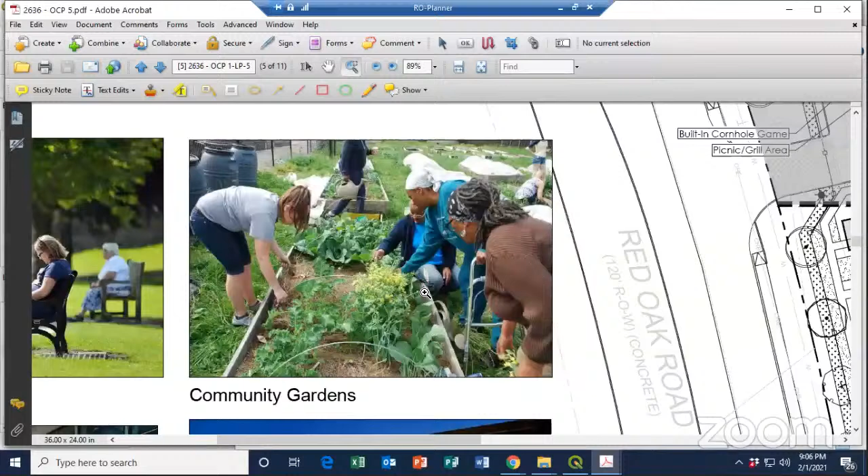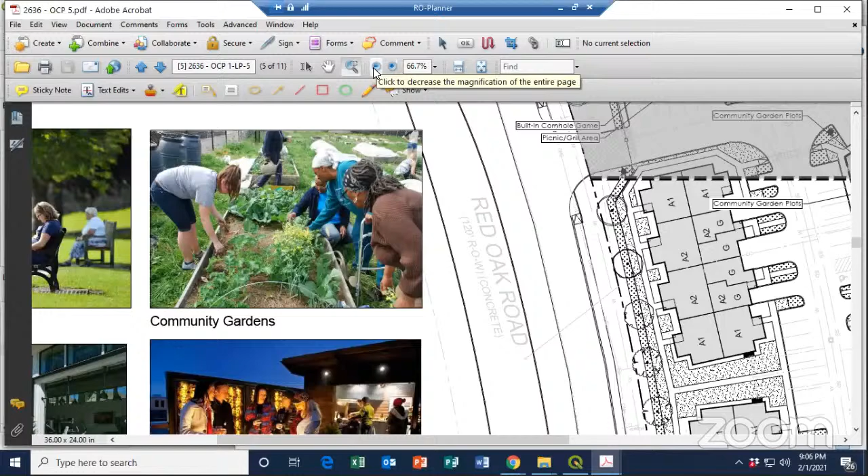Thank you. Frank, can we go back to the screening question, and I apologize you guys for having to catch up here. Just kind of give me that one more time, what we're looking at, because mine's historical way back, and that was a big concern of what it was going to look like from the roadway, things of that nature. So if you could just kind of hit that for me, I'd appreciate it.

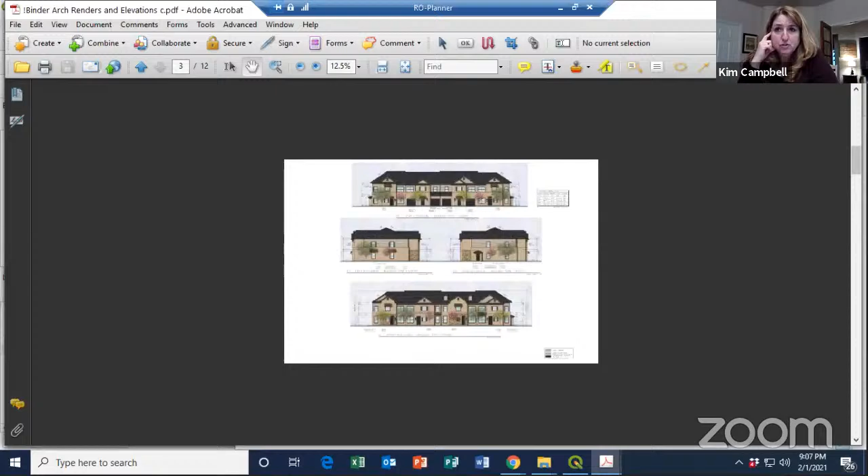And while you're bringing up those pictures, I have just a knowledge question for Mr. Stone. I was curious, I was looking at the number of one-bedroom apartments compared to the two bedrooms and three bedrooms, and of the 304 apartments, 210 of them are one-bedroom apartments. Is that typical in an apartment complex, how the ratio is broken out between the 1, 2, and 3 bedrooms?

It actually is. This is a standard straight down fairway type division where it's roughly 60 to 65% one bedrooms, another 30 to 35% two bedrooms, and 3 to 5% three bedrooms. What we see here is young adults moving in, some commuting into work, and maybe as things expand with Google and similar companies, you might find more coming into your market, which might be more engineering-direct, and you're going to see some one-bedrooms being used. It's also an attraction for teachers, firemen, police officers, and things like that.

Okay, thank you for that background. Scott, I'm sorry, I didn't mean to hijack your question. Oh, hey, no, great question.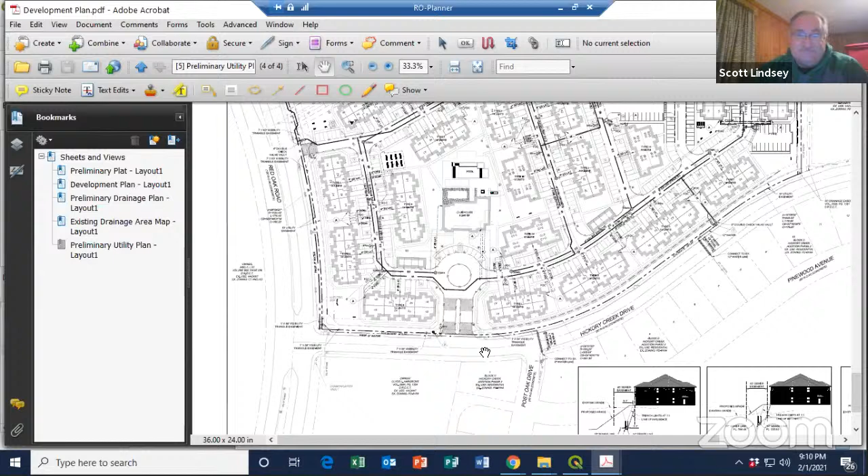Thank you, Mr. Scott. Any other comments from the commissioners? Nope, that's it for me. Taylor, deliver it.

Yes, from my standpoint too, I wasn't on the last discussion, but just looking at the plans over the weekend, right now it looks great to me. So Red Oak is growing. You got new apartments, like the developer said, attracting individuals here. You have Google going up and some other data centers coming behind that one. So I think it's a good project here for Red Oak.

Can I have a motion for agenda item H, please? I motion to approve the development plan for the completion of the - should I call it development proposal? - to approval as is. And if I need to restate that, I can.

Well, I guess the only issue we have left is how y'all feel about the screening on the northern end over here. Yeah, that north side is supposed to be, or is kind of planned to be just single family. It might be something like maybe smaller lot single family, but single family nonetheless.

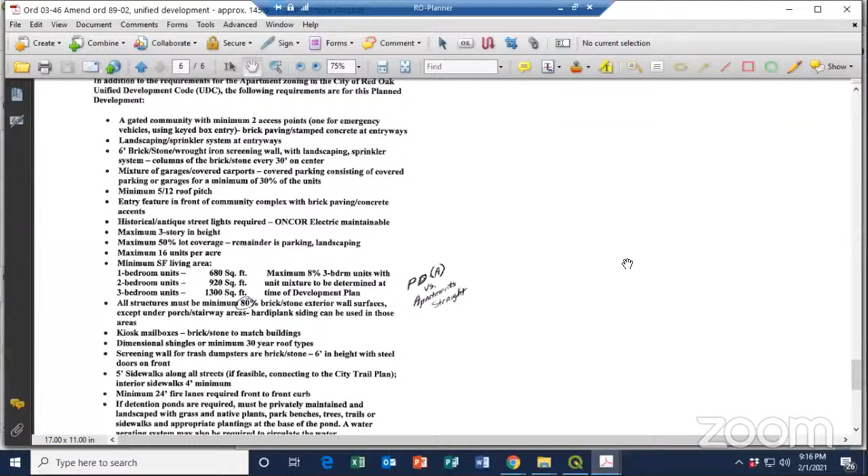But again, like Brian said, it's kind of a problem for the landowner, because it would be a negotiation point between the landowner and whoever's going to develop that next. But again, Brian's just stating typically what we do, because that's how the code's written. Typically, right now, the person who's building in between the single family and the not single family would be constructing the screening wall, the masonry opaque screening.

The practical thing is, assuming Mr. Taylor builds his proposed fence on his side of the property line, if they develop a single family on the other side, what are they gonna do? Are they gonna put a wood fence up against it? That may look weird, I don't know. You get all kinds of problems from that, because even if you leave 6 inches, it's unmaintainable, you get little trees growing in there, and then all of a sudden it's not looking great.

And I don't know that we have any means of requiring that the future buyer of that property work it out with the current owner of the other property to jointly put in a masonry wall. That's not gonna be a practical solution in the future either. So it's just one of the things, if we hold to that standard, someone's gonna be asked to provide it at that standard, if we're holding to it.

And like I said, we can't really force it, but I guess he could negotiate that with the next buyer. They could come up with a conclusion like, hey, if they really want this tract, let's go half on this fence. Mr. Leibowitz, if he's watching or listening, is certainly on notice that that'll be the expectation. So if someone calls prospecting on that land, assuming this gets approved as is, I'll be letting them know, hey, when you're doing your business math, be aware you're gonna have to provide the masonry wall, or design it in some way that you wouldn't have to, or ask y'all why he shouldn't have to develop that way. So that'll just impact the next section of development.

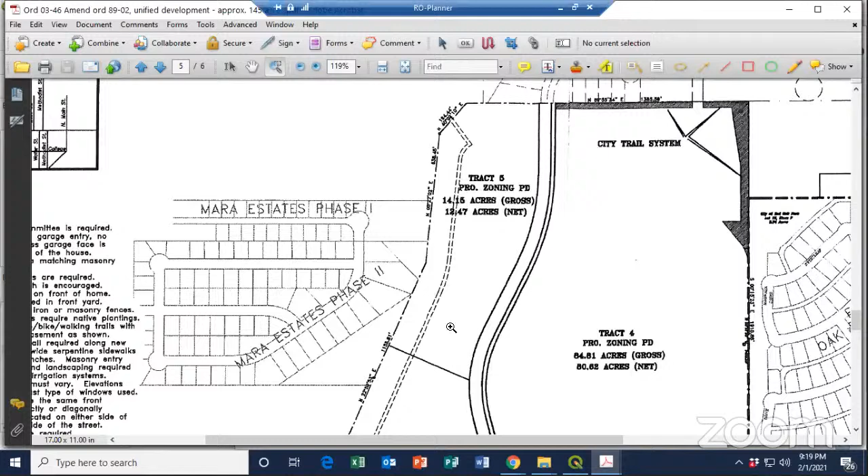Yes, and that's, we're trying to kind of work within what the PD says, which has this language that says masonry slash brick slash, I don't have it right in front of me... so that one was applying to the single family part. This one applies to the multifamily part. Right, okay, so it's a 6-foot brick, stone, wrought iron screening wall with landscaping, sprinkler, with columns of brick and stone on every 30 feet on center.

I think the applicant has termed that to mean they can either do brick, stone, or wrought iron screening wall, with the columns of brick or stone every 30 feet on center. And I guess from a staff perspective, we generally... Wrought iron is not screening. Right, but along the roads we're not necessarily against it, but where it abuts the single family, because the road acts as a natural buffer plus it's got a lot of landscaping in front of it, the area on the north end of the development we would deem that probably needs to be the brick screening wall, just because that's what our standard code is, and that's what we would require on any other development like this.

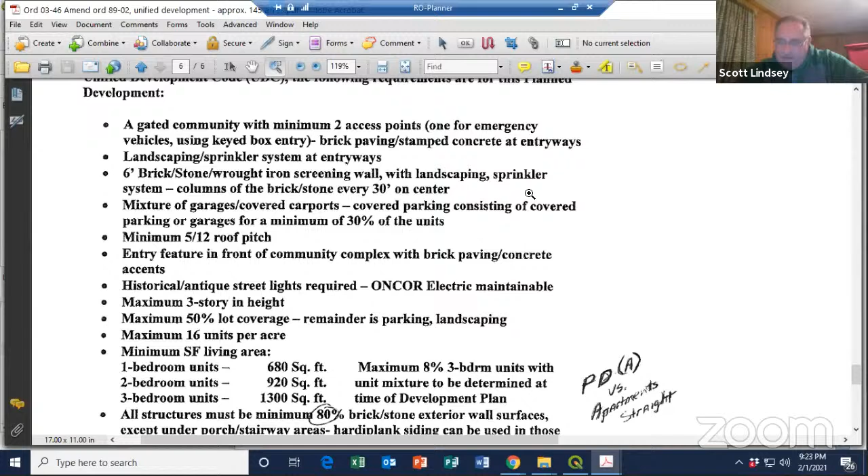And I guess you guys have, the reason I didn't bring up any objections to that is you guys have been looking into this. I know, again, all I can do is go back, and in back years, we talked about not having the wrought iron, having it actually masonry walls. But I understand it on the front, but on the back, I would think that it would be their responsibility.

I guess my question for staff, was this brought up at all with the applicant? Yeah. And the applicant just left it? It didn't want to. Okay, so that's, I mean, we understand his point. He's saying, well, it doesn't say I have to do it here. And staff has said, well, but we've got the standard in the code that we think applies. And he's understandably said, I don't want to. Again, it's expensive, I mean, we understand that.

But yeah, I mean, this isn't a surprise, we've mentioned it. So I'm just, for example, if someone bought that adjacent lot, and they want to put houses there, that person will have to put a masonry wall right there, right? If we're going to follow that standard, that person will have to build the masonry wall abutting this wall here.

Yeah, I mean, you can imagine this is one reason why most developments today, nearly 20 years later than when this PD was passed, would normally, in their planning for the area and as they build, might even be required to build, I believe as we do now, like your perimeter wall. Right, like a lot of times we ask that gets done early on. Kind of because, what would probably make, granted, these aren't going to be shared properties. Not sure how you'd split it because this is different, but you probably would have wanted this clearly stated and locked in and essentially implied who's going to be the one taking ownership of it.

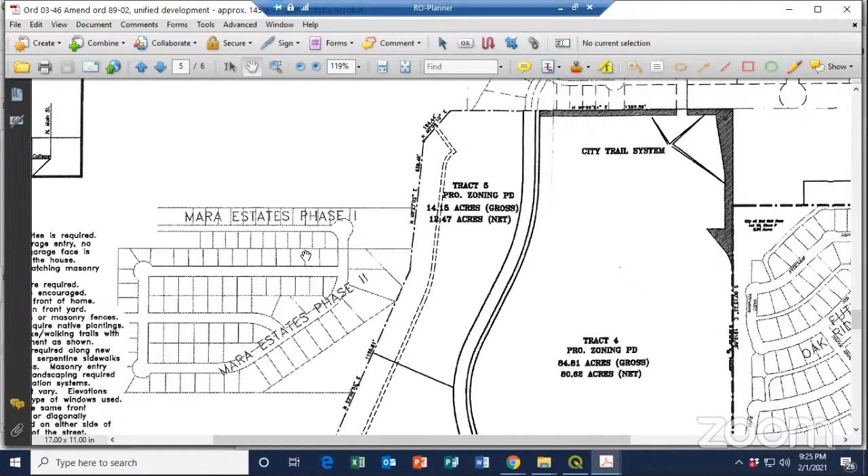And I believe the ordinance says something about things as amended, somewhere here. Usually we have standard language that says codes as amended. Again, I'm not an attorney, but I would think that standard would apply unless y'all didn't want it to. I'm looking for the language, I don't know. We do have our city attorney present, so if y'all want to ask her to weigh in on this issue, it won't hurt my feelings.

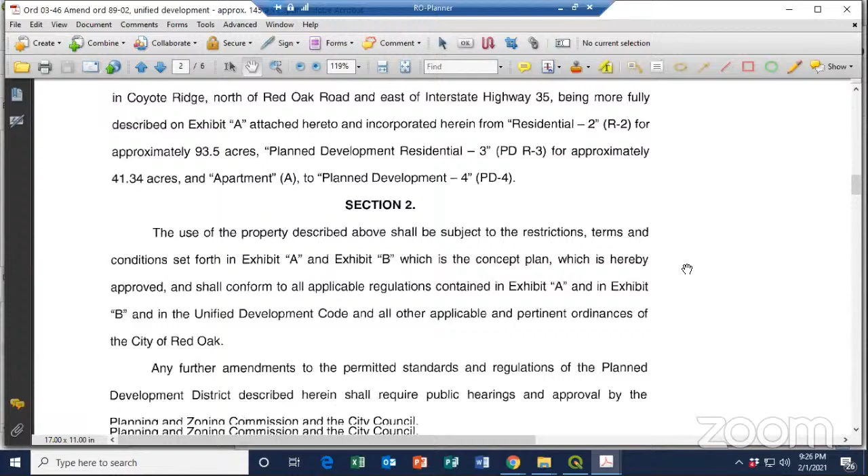Can we, Mr. Chairman, because I think this is very important. Residential, I think it's something we should definitely, I mean, we look at everything, but residential becomes a little bit different story when it abuts residential. I guess my thing is, could it not be residential? If someone bought this and they want to do a zone multifamily and it got approved, what is it? Yeah, that could happen, that could happen. I'm just thinking if it could happen. I mean, anything can happen, all you got to do is submit an application.

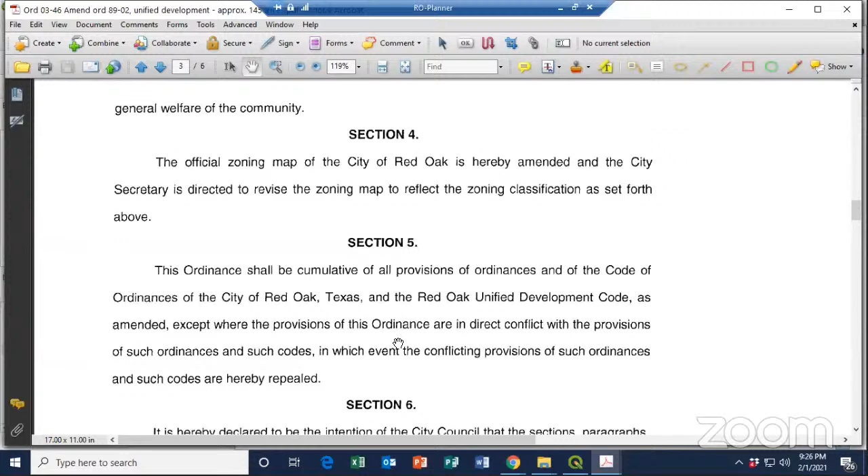So if that did happen, if there was multifamily there, the fence would be fine, right? The wrought iron fence. Yeah, yeah, what you're saying, yeah, but I think...

Alluding to what Brian said earlier, you kind of gotta think in the worst case scenario because it's already there as single family, so it's less likely for someone to come in and try to get higher density. Not impossible and not totally out of the realm of possibility, but the way our code is written, it's supposed to be done now.

And just to the point I was mentioning earlier about the language, I think this is the language I was looking for in section 5 of the ordinance for the PD. This ordinance shall be cumulative of all provisions of ordinances and of the Code of Ordinances of the City of Red Oak, Texas, and the Red Oak Unified Development Code, as amended, except where the provisions of this ordinance, meaning this PD, are in direct conflict with the provisions of such ordinance and such codes, in which event the conflicting provisions of such ordinances and such codes are hereby repealed.

Mr. Chairman, Mr. Taylor's asking if he could speak and offer a compromise. What do you? Go ahead, Mr. Taylor. Okay, thank you very much.

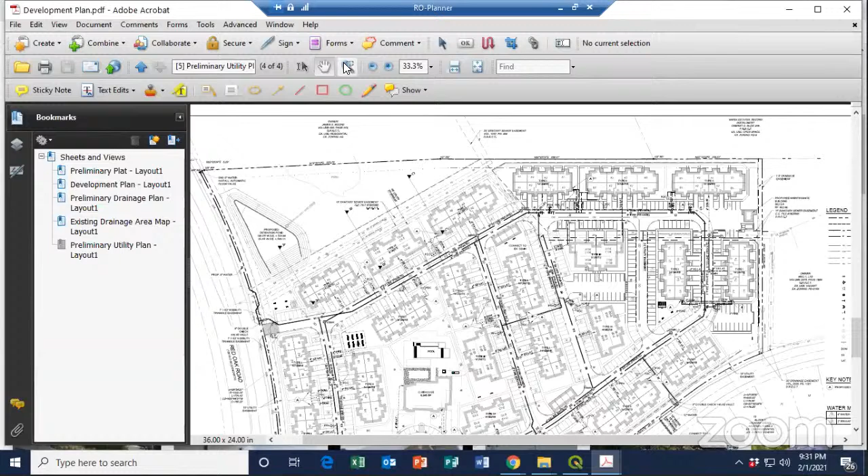Makes sense, that's a good idea. Taylor presented taking the columns off - I guess that's the west side - yeah, if you want to pull up the development plan, just so everyone can see, and make the north side a solid masonry fence wall. Show it on here - I think that's here on the utility, go to the first page.

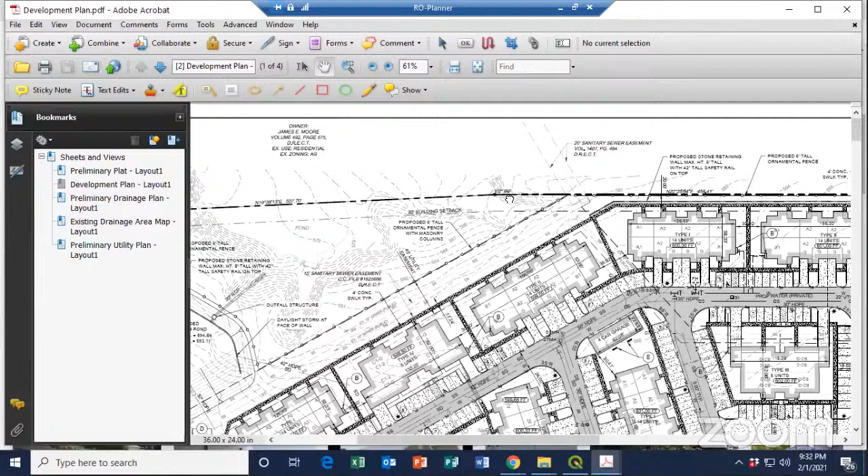It goes all along that back property line and into the dog park area and around the detention pond. Now, as soon as it gets back to where it's along Red Oak Road, those masonry columns would have to go back on. But I think starting right, where it kind of starts wrapping and heading north along the backside of the detention pond, if that was just straight wrought iron across there, I don't think there'd be an issue with that from an aesthetic standpoint.

Just because it is in the back of the development where it's more difficult to see back there. And you can't really tell from this, but the grade drops down quite a bit back there, so there's a good chance you wouldn't be able to see it anyway from the roadway, because the grade drops down so much from the actual complexes and from the roadway.

I'm trying to mark in red where we're saying we would give up columns. Taylor, this is the areas you're talking about, right? Correct. Yeah, I'm still on the negative side of the equation, but every little bit helps at this point.

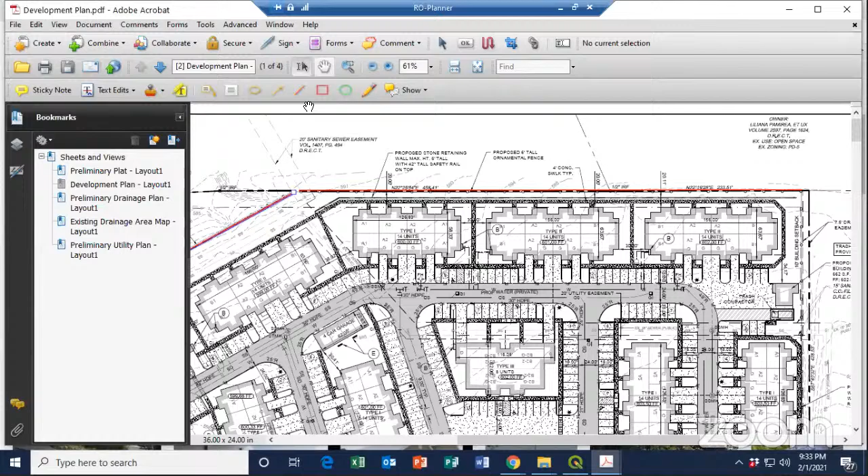I didn't want to get into this one. We've spent a lot of money trying to really improve this for the city, and yeah, it's starting to get real tight. But I'd be willing to do that and then put the solid wall on the north side.

I personally would be fine with that. Yeah, I think it's a fair compromise. Yes, I'm agreeing with that, with Taylor's proposition. Yeah, but I just have to, I wouldn't be able to sleep right if we didn't protect that residential side.

And just so y'all know, none of this was submitted without Mr. Leibowitz's approval. He knew what was being presented on the north side, but I do understand your position of protecting it in the future, and that's fine. But he did see it.

Okay. All right, can I have a motion, please, again, for agenda item H? I move to approve agenda item H, pending removing the columns in red that's placed on the development site plan in exchange for a masonry wall on the north side of the property.

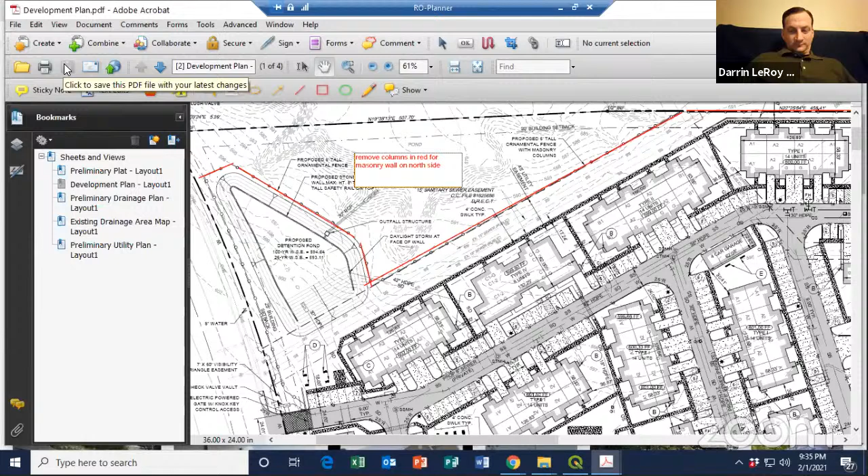All in favor? All right. Any opposed? I think she was voting in favor, there's just a lag. Voting against? Ask her to clarify. Can you clarify, Miss Kim? Was that aye for? I'm sorry, I was voting in favor, I just couldn't get to the unmute button fast enough. That's fine. Okay, we have no no's, so agenda item H has been approved.

Moving to the next item, item I, executive session language. Well, we don't have need for that, so we can go to our consent agenda. Correction, no agenda I. Last thing to do is to

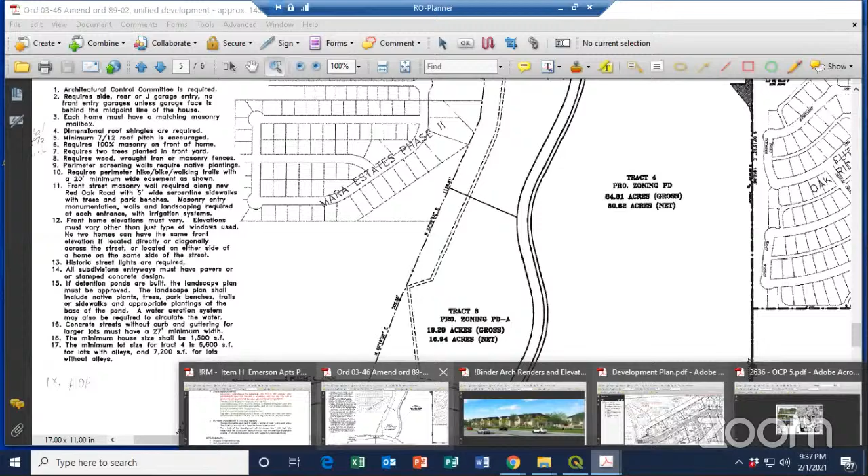Go with the consent agenda items. We have 2 of those. All items listed below are considered to be routine by the Planning and Zoning Commission and will be enacted with one motion. There will be no separate discussion of the items unless a commissioner or citizen so requests, in which event the item will be removed from the consent agenda and considered in the normal sequence. Approval of the consent agenda authorizes the administrative official or designate to place each item on the city council agenda in accordance with the Planning and Zoning Commission recommendations. So like I said, we have two, A and B.

So, commissioners, have you had a chance to look over the agenda items A and B? Oh, yes. Any questions? I have none. Any concern? Well, yeah, with that as a consent agenda, you'd just be voting to approve it or not, unless you want to take something off to discuss. But otherwise, it's just, you vote in one motion to approve it or not.

And can I have a motion? Mr. Chairman, I move we approve the consent agenda as listed. A second. All in favor? Aye. Unopposed? Consent item agendas are approved.